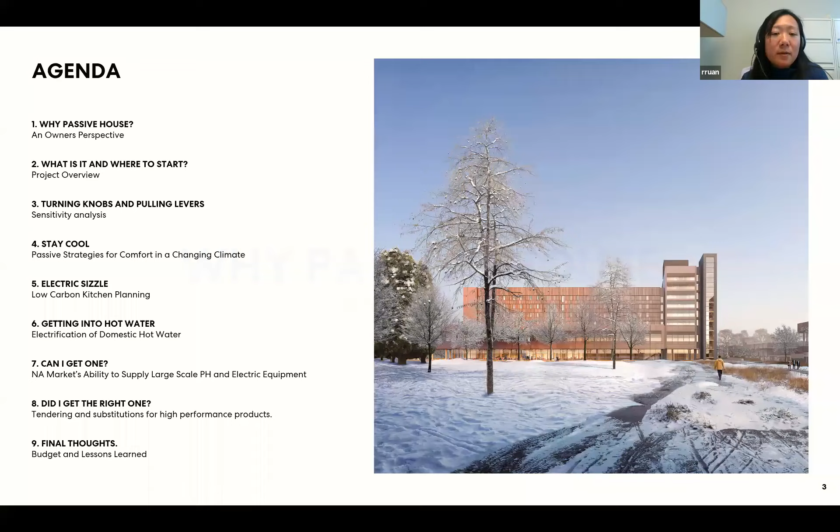The university's big problem, and why they turned to Passive House, is summed up by this slide. On the left we have their existing emissions profile, about 91% from gas. On the right is their emissions profile over time. The black line is the historical emissions profile, the yellow or gold line is their projected emissions profile, and the green dotted line is the provincially mandated reductions in greenhouse gas emissions.

So it's obviously a big challenge for any institution. They're trying to grow their institution and grow their square footage, but they need to lower their greenhouse gas emissions profile. That framed the problem for us, and Passive House was seen as an appropriate vehicle to begin tackling it. You can see that by 2030, their initial target, they have a significant emissions gap per year.

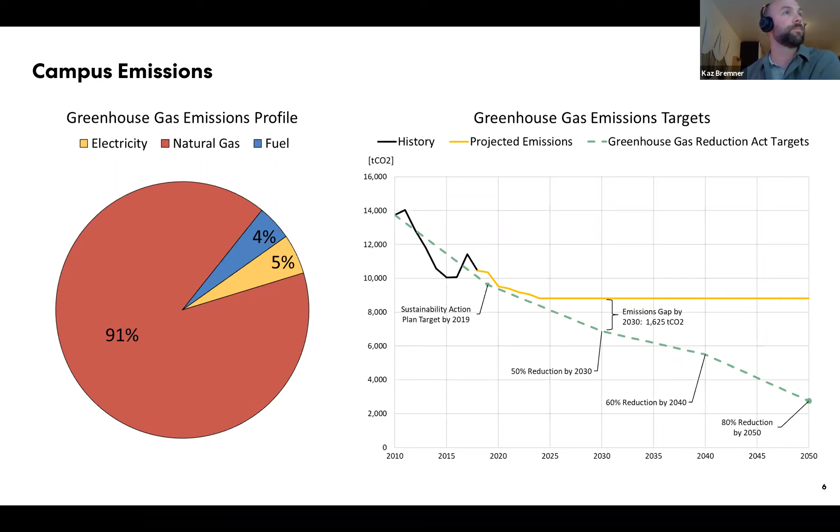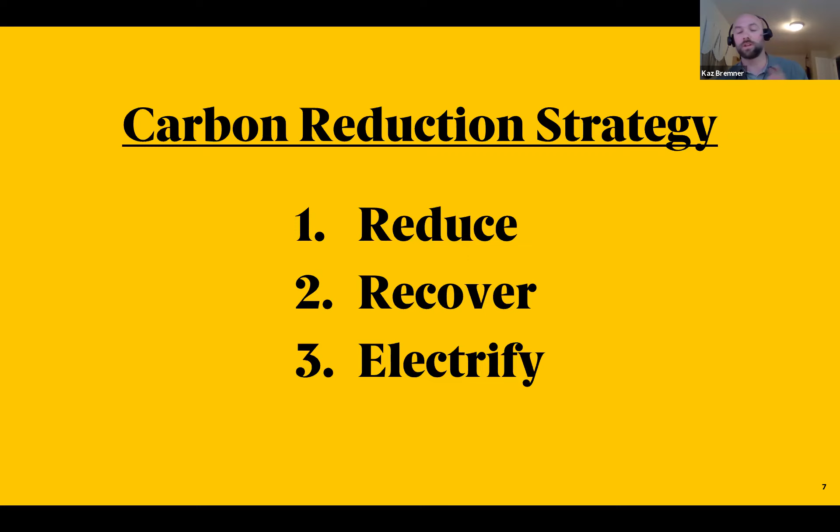So the general strategy we'll talk about today is simple: reduce your need for electricity, recover heat where you can from any heat source, and then electrify. We'll touch on that. Electrify for this project what remains.

Before diving straight into the Passive House target, we wanted to have a quick chat about carbon, because everybody is familiar with the fact that you only have a certain amount - your EUI, your total energy use intensity, which is the metered energy - but you need way more at the power station because of all the losses throughout the process. That changes with the carbon intensity of the energy source you have. So we're all familiar with that idea.

However, when we look at Passive House, we don't necessarily see the word carbon. And yet we still have that same idea in the primary energy renewable target, which might not always be clear to people, but is actually a mix of two measures: the total energy use intensity in your building, and the carbon or energy cost based on which energy source you're working with. So that primary energy renewable target, the second target for Passive House certification, encompasses both. It's not because we don't see the word carbon that Passive House doesn't fully care about it.

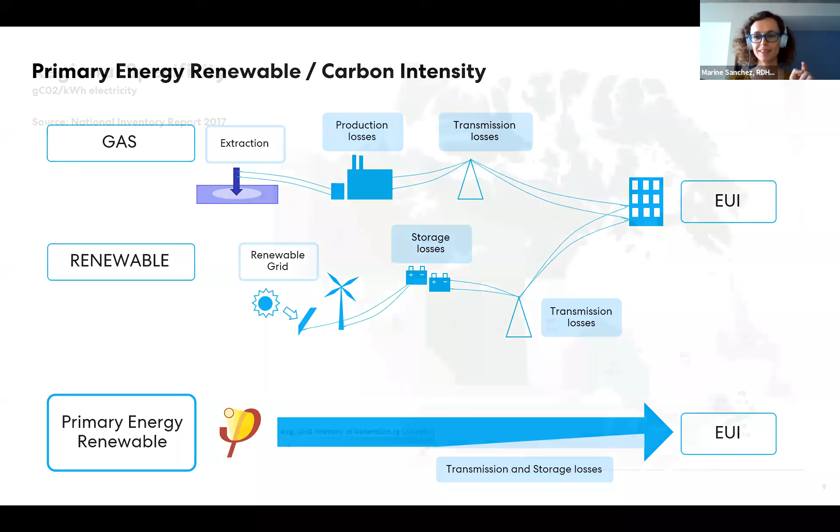What you're seeing here is the carbon intensity of the electricity grid in Canada. I'm sure you're all familiar with this, but it's worth pointing out the difference in factors - roughly, BC is already at a good start, not the best, but really good at 12.9 grams of CO2 per kilowatt hour. Alberta is roughly 60 times higher than that, which really changes the context.

Whereas for some of us, including me, working on the east side, Ontario is about 40, which is still 3 times higher than BC, and Quebec is leading the way with like 1/10 of what BC has of the carbon intensity of the electricity grid.

So it is definitely important to look at the overall picture and then zoom in into where our building is located. So zooming in a bit more, what does it look like for BC?

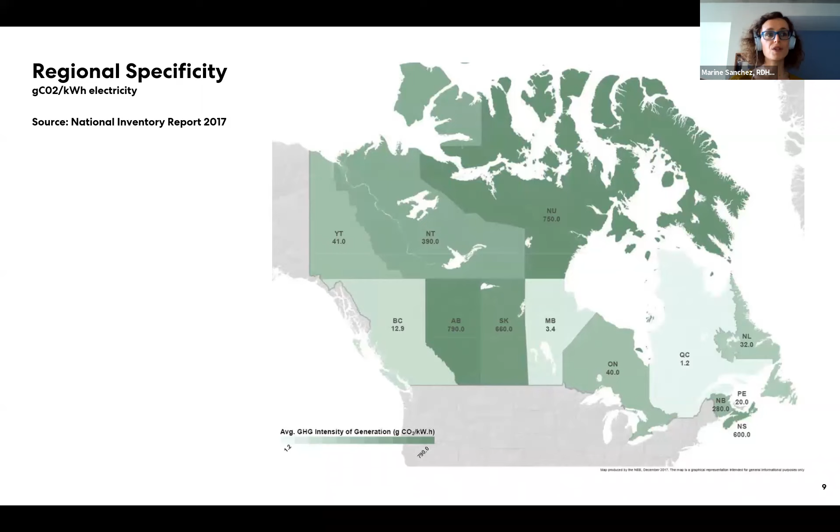Well, we've already seen the greenhouse gas emissions through the previous slides, where you can see the huge discrepancy on the right between the greenhouse gas emissions associated with both the gas and electricity sources. And then the paradox is that the cost is the opposite way, which is not always helpful to make the right decisions. So Kaz and Rufi will touch a little bit more on that later on in the project.

Sorry, so just to step back a little bit, not assuming everyone is familiar with the project, we'll just walk through kind of what the project is, where it sits, what's comprised of, to give everyone a sense of really what we're talking about here.

So zooming in, we saw sort of the aerial photo of UVic before. Here it is just from the top. It's defined by the ring road. The academic precinct lives within the heart of the ring road, and their housing precinct is just to the east, identified here by the dashed line.

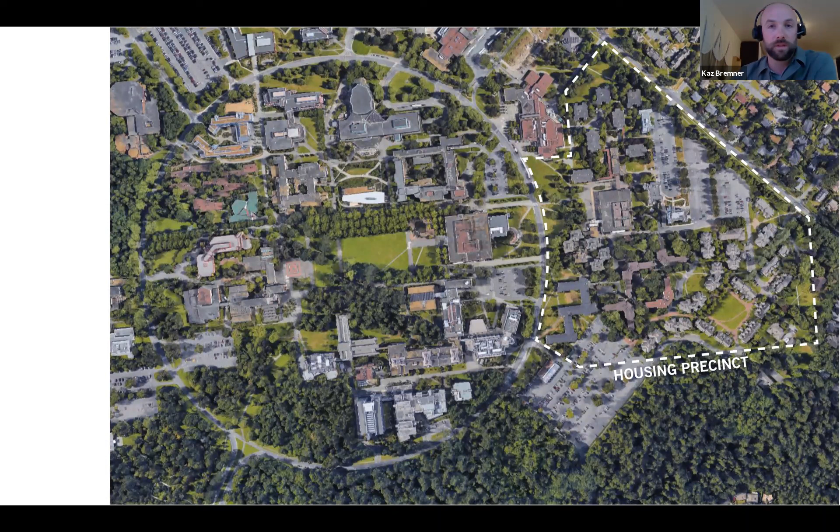We have a large amount of programs, about 330,000 square feet, and it's split across 2 buildings here to help push forward some of the urban and campus objectives that UVic has in place.

The siting was largely driven by the existing campus greenway, which currently runs through the heart of the ring road. It's really high value public thoroughfare, but really peters out at Ring Road. So this siting gave us the opportunity to drive that across Ring Road to better connect the campus and revamp their campus greenway, and also provide a north-south greenway as a new spine within the housing precinct, which will help them organize future renewal and development.

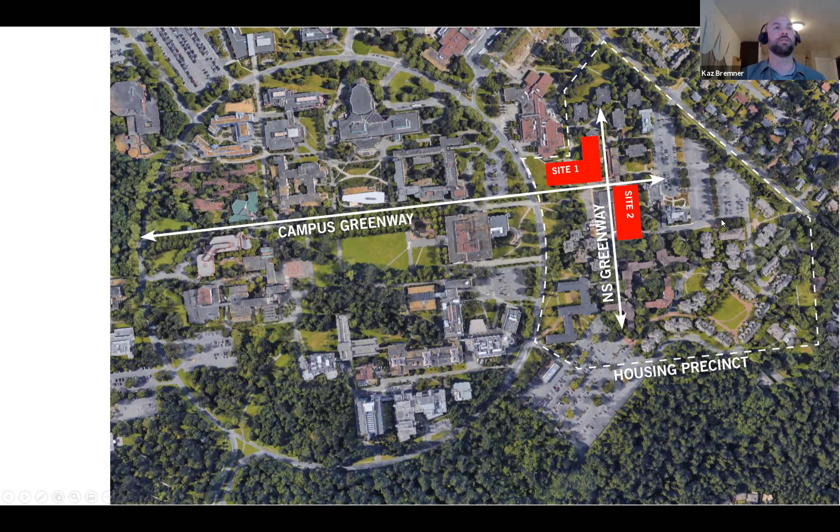At present, a lot of the housing on campus has been developed over time. You can just see from the photo here, there's a lot of townhouse development from when they had the Commonwealth Games, and then they've just sort of piecemealed together as they've had access to funding, and this will help give them an overall master plan framework.

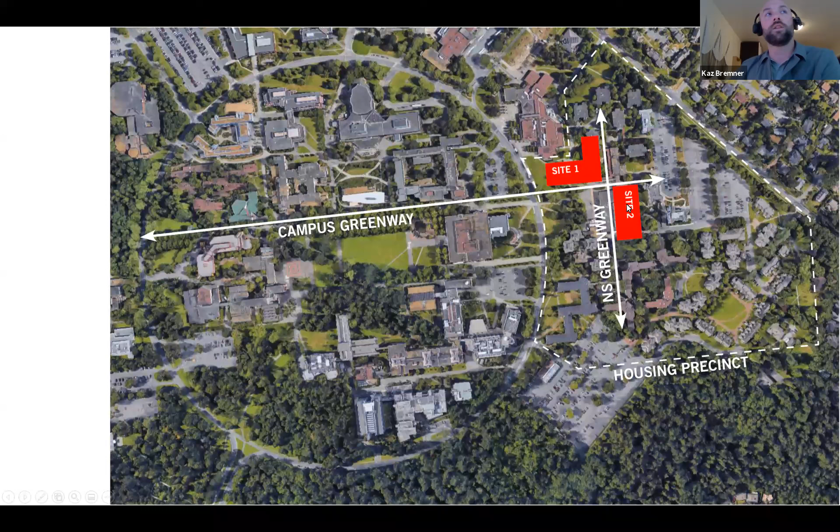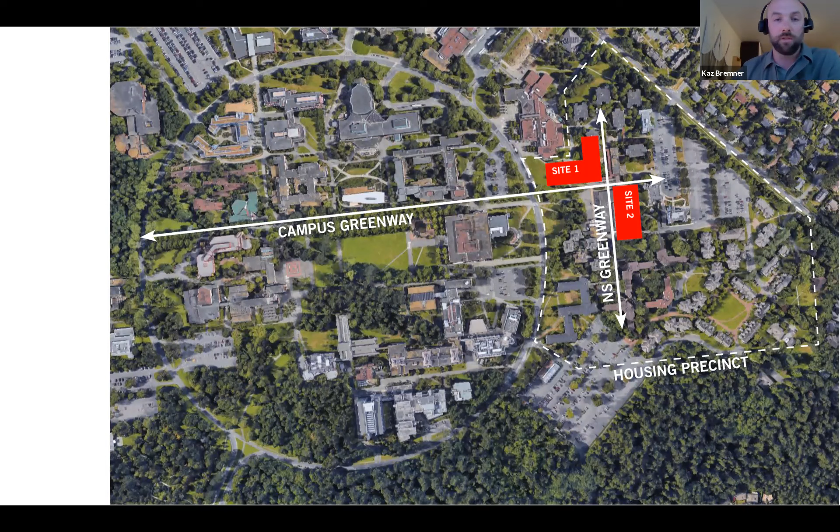I should quickly note that we are deconstructing 3 buildings: 2 existing residences that are aging and in need of a large amount of repair, and their existing dining hall. So with those 3 buildings coming down, we're adding about just over 620 student beds, but we'll have a lower carbon footprint overall. That's a really compelling part of this project - they actually get to grow their campus, but have a lower greenhouse gas emission profile.

So what's in these 2 buildings? This is site 1 on the left and site 2 on the right. From level 3 up, they're both student housing. Site 1 is 6 stories of student housing on a 2-story podium. The second site is 9 stories on a 2-story podium. In site 1, there's a mix of program in the podium spaces, which adds the complexity - the student housing part isn't the hard part, really.

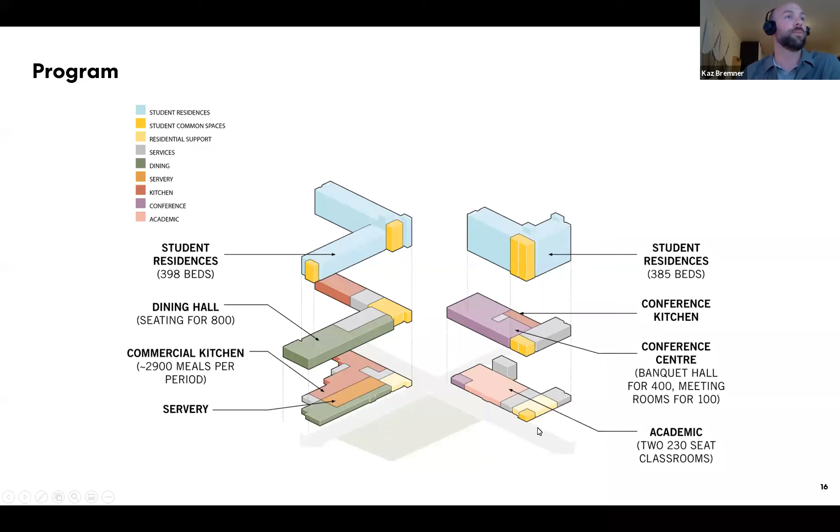But in site 1, we have a commercial kitchen that's serving about 9,700 meals a day. An important note here is that no one's really attempted to certify a kitchen of this scale before, and we'll get into that more later on, but it's an interesting component of this. We have an 800-seat dining hall identified in green, kind of wrapping around the servery and the kitchen. Then in site 2, we have a banquet hall seating about 400 people and 2 large academic lecture theaters on the lower floor. So it's quite a complex mixed use program.

So how do you start that? We worked quite closely with RDH on this and Integral, the whole team, to figure out how do we start to eat this thing in bites. So the tower area on site 1 specifically, which is the more challenging site with the commercial kitchen and the high energy use, about 59% of the floor area is the student housing portion. So we split that into one PHPP model, and then the more complex podium became a separate PHPP model.

So we're working with two problems, one a little easier than the other, taking a blended approach overall. Just to start off and set some targets before we get into the details: we knew the podium, or public spaces, would want more glazing and require more energy use, while we knew we could be relatively aggressive in the student housing portions, since that's a typology that's been certified a number of times across the world.

So we set our space heating demand targets at 8 for the student housing, trying to almost cut in half the Passive House target, and about 25 to have a little more generosity and allow more glazing in the dining hall and similar areas, getting a blended ratio of 15, hitting the Passive House targets overall.

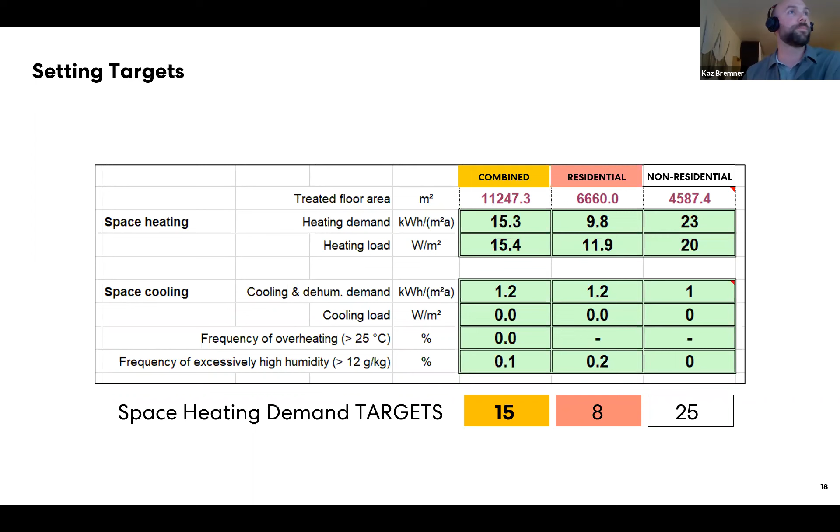One thing we knew could be a struggle through the design process was having a strict glazing budget. These are very public buildings; they want to be transparent in a number of places. One of our concerns with Passive House and client side from the get-go was the idea of a windowless box — that still exists when you see photos of old Passive House projects. It's not the glass box people may want to see in modern architecture.

So we thought about our glass ratio as a budget, and tried to spend it very generously in high-value areas, migrating the public program to where the glass is, or co-locating those things. Here in orange are the public areas — the student lounges up the tower, and the podium spaces — that's where we tried to spend our glazing budget. Also, the form of the building naturally overhangs some heavily glazed areas to avoid the penalty of introducing shading there.

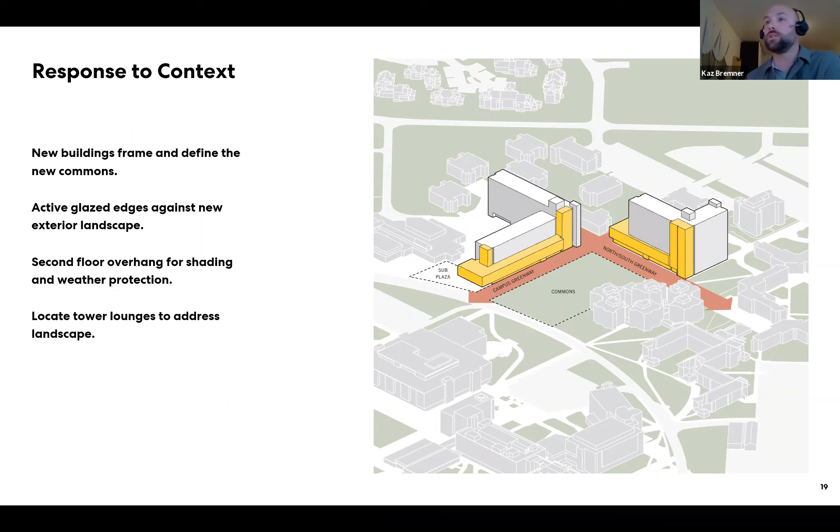After going through these exercises and right-sizing the glazing to the project — looking at each space and what it needed, being generous where it made sense — our original targets were about 30% window-wall ratio through the student housing upper floors, and about 50-50 down low. Generally we recommend a reasonable starting point for high efficiency buildings of about 40% glazing for a residential typology — that's the ballpark.

Here, through the design exercise, just due to the typology, we ended up with 16% glazing through the tower portion — actually a lot less than we anticipated — and only 25% in the podium. I'll walk through what that means.

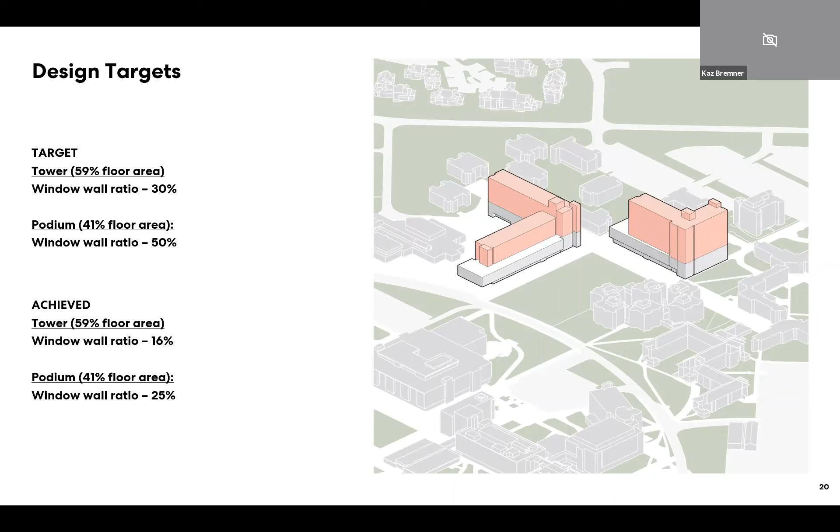That feels really low, but here's a rendering from the interior of the dining hall on the first site, looking south toward the public green space. You can see complete walls of glazing, both upstairs and downstairs, creating as much transparency as possible between the new public realm and these public spaces, opening them up. It just means we're more conservative with glazing where it isn't required.

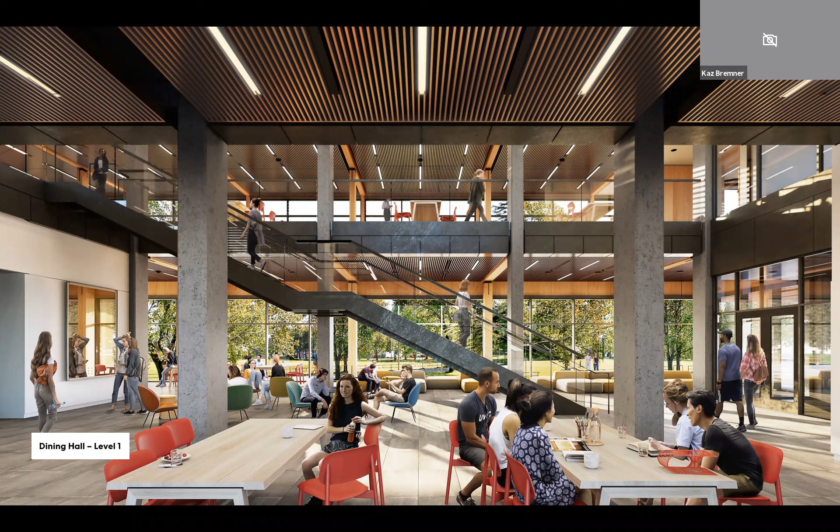So the takeaway is you can still have amazing spaces, amazing urban realm, and amazing transparency, but hit really high efficiency targets. It's all triple-glazed, thermally broken curtain wall, just FYI. Here's another view looking at it from the southwest.

So that's a little bit of the background, sort of what we're looking at. And then for how we sort of started under the hood, I'll let Maureen walk through that.

Thank you, Kaz. As Kaz mentioned, we started with a couple of SD PHPP models, PHPP being the software for Passive House certification. We started with these SD models with rough targets, but in no way is Passive House prescriptive. So more or less, we got into a big game of turning knobs and pulling levers until we found the perfect combination. That's what we were after.

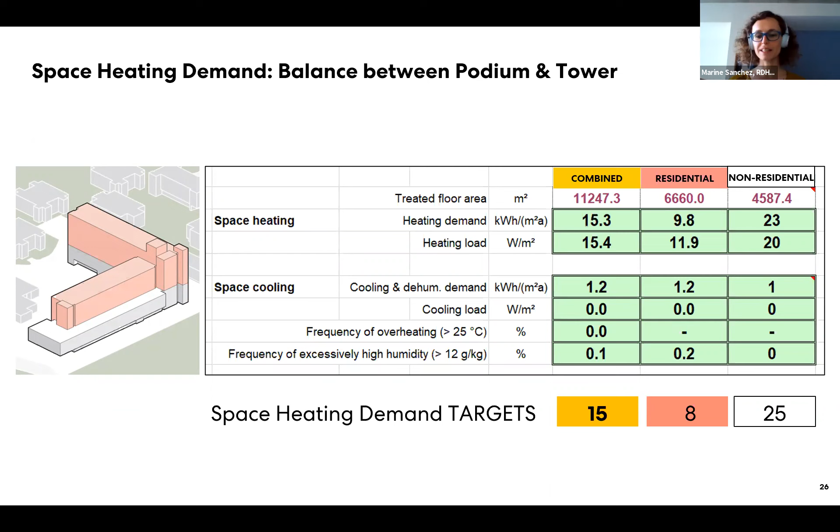Having that starting point, we started to touch a little bit of every plate, every box, every heat loss and heat gain, trying to understand what would make the model sway a lot and what would barely make the model sway.

And this is where the fun really started, with all the graphs everywhere and trying to move literally 15,000 things at the same time and saying, okay, what did I learn today? And what you're seeing is that out of all the sensitivity analysis that we did, the big levers were not necessarily the ones we were thinking about. We found a few more than these three graphs, but we'll start with that.

You're looking on the left at the external wall insulation thickness with and without insulation in the backup wall. You can see that this is moving our tower between a range of 7 to 17 kilowatt hours per square meter per year for the heating demand. Quick reminder, we were trying to stay around 8, so quite a big swing.

For the podium, where we were trying to stay around 25, you can see that the kitchen—we have a big kitchen, we'll dive into this, but spoiler alert, we do have a makeup air and an extract—and the running time, the profile of that ventilation system, made us have a really big swing, roughly between 25 and 40. At 25, we're all good, we're still passing. At 40, we're like, I can't see certification anymore. Guys, can we do something? So that was another big one that swayed the model quite a lot.

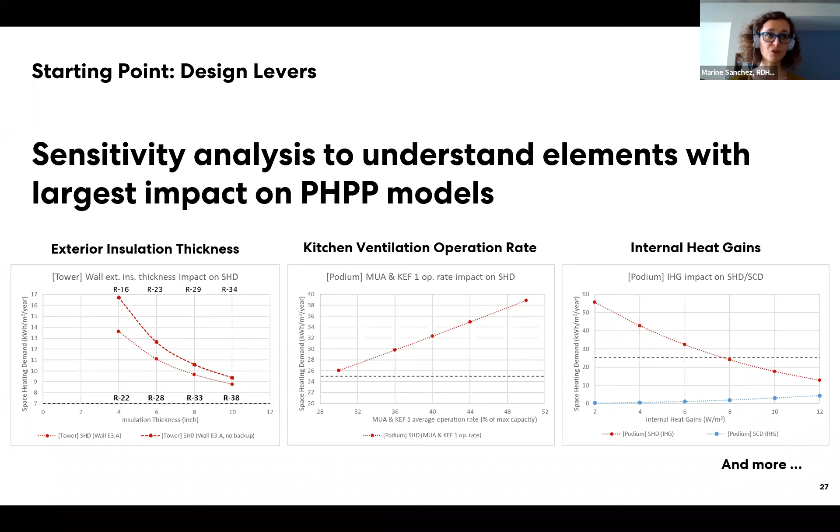So that was a lot of work on all these levers to get to what choices I should make to maintain my space heating demand criteria, which is the first criteria. Now, it'd be too easy if that was the only criteria we were struggling with. So we move on to the next criteria for passive house, the primary energy renewable, PER.

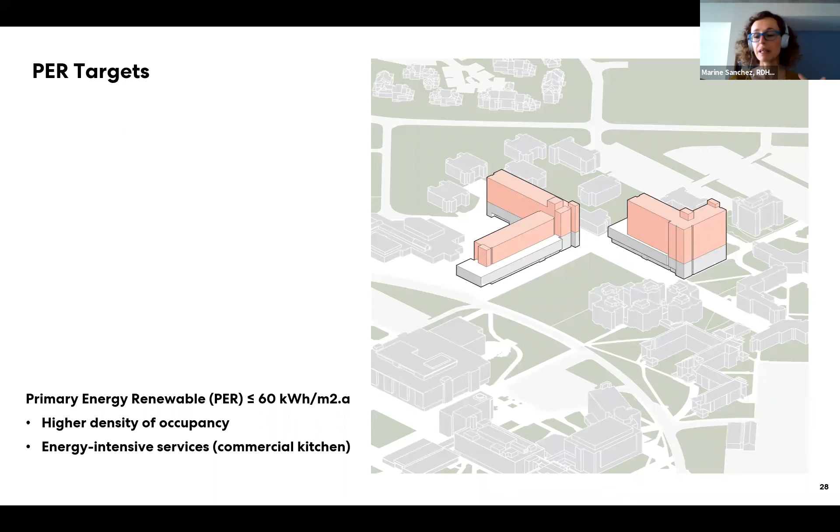The typical PER target is set at 60 kilowatt hours per square meter per year. But in our case, we're dealing with buildings that have a much higher density of occupancy than typical buildings, and we're also dealing with end uses that are terribly energy intensive, such as the kitchen. Luckily, we found a way to obtain additional allowance for the PER target.

We played it in two different ways. We looked at the tower first, in that pink color. After being in deep discussion and negotiation with PHI over the last 2 to 3 years on large buildings, and repeatedly finding that these large buildings could not fit within the allowance given — that 60 kilowatt hour per square meter per year — they created a tool to say, okay, we recognize that depending on your occupancy, the size, and the number of occupants in your building, you should be allowed a little bit more. So we used the tool to get an extra allowance on top of the 60.

For the podium, we also managed to get an extra allowance, but on a different basis. That time, trying to be fair and look at a metric that would be fair against other buildings, we're not talking in square meters anymore — we're talking in how many meals we're delivering every day and how much energy is required per meal. So we'll see with the kitchen section the dive we went into to get to that energy-per-meal approach and additional allowance.

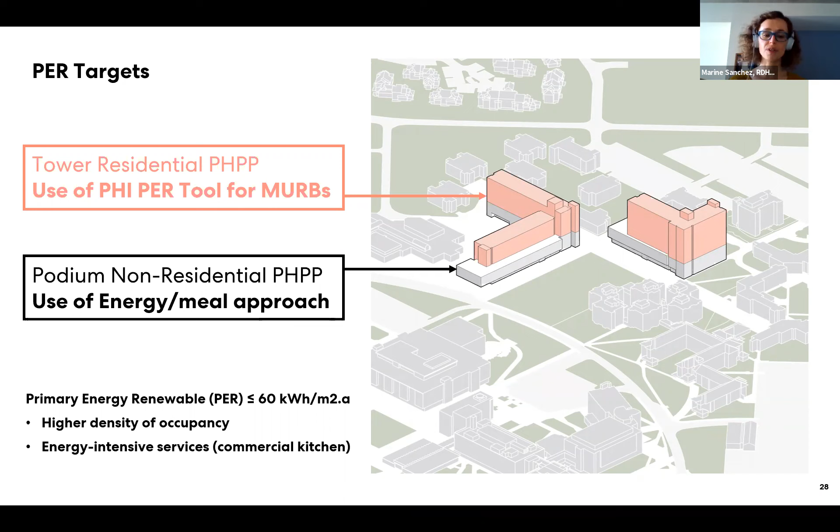Giving you a quick snapshot on the tower, you can see we had a little bit of an issue to start with. This is the split per energy, per end use — heating, cooling, domestic hot water, and household, with a different degree of granularity, plugged against the 60 kilowatt hour per square meter per year PER limit we had. You can see we're miles past that. So we were all scratching our heads a little, saying, I do not really see how much better we can get to get back in line.

Now, using the new tool that is available from PHI at the moment, only through certifiers, we plugged all of that in and had a big sigh of relief. I think we had probably a little happy dance with the design team, saying, hey guys, with the type of building we're talking about and the number of occupants, this is what we're looking at.

We're looking at a PHI PER allowance from 100 to 115 roughly, which is being refined as the design progresses. The density does have a play into the total amount of energy your building is going to use, as well as your PER target. Using that tool definitely saved us in terms of what was allowed, and gave us a bit more breathing space back into the design, because this helped inform the decisions we had to make later on.

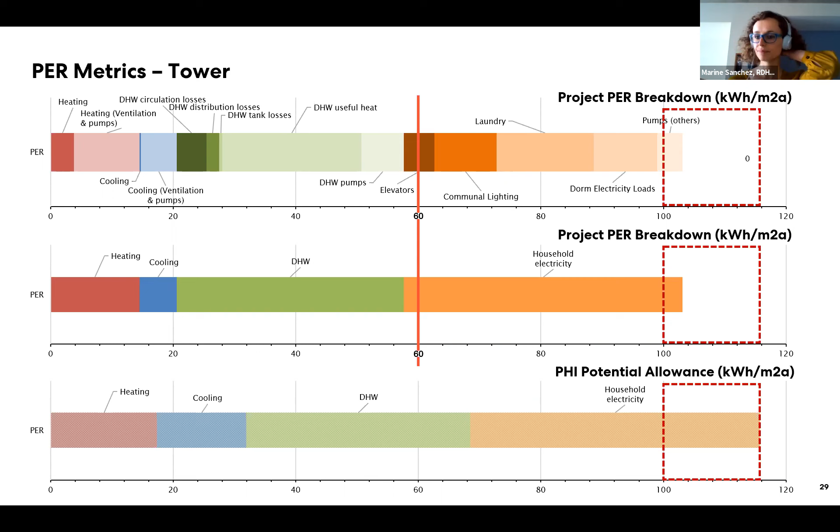Thanks, Marine. As mentioned by Kaz and Marine previously, the project is working very hard to meet passive house onerous space heating demand and primary energy targets. However, passive house requirements are not the only focus throughout the whole design process. The design team and the client have given a lot of consideration to future climate change, like how to make the building resilient enough towards future climate change. Because we know passive house encourages the building to have a very robust envelope to minimize unnecessary heat loss, however, without clever planning, this may also lead to overheating risk by trapping all the internal heat gain inside the building facade.

I guess just trying to give everyone a bit of my background. I worked 12 years in the UK before moving to Canada, and in the UK, usually at the beginning of the project, we always undertake two analyses: one is the overheating modeling, and the other is the PHPP modeling.

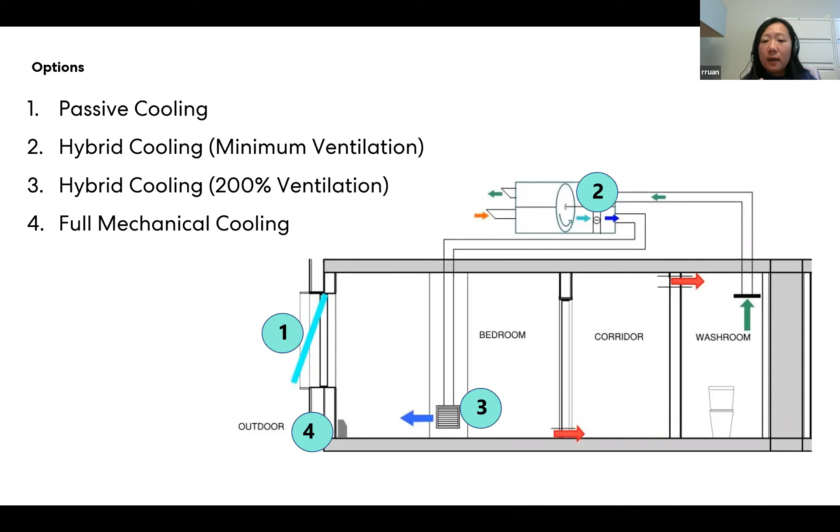So what we considered at the beginning are 4 options. Option 1 is to use passive cooling through natural ventilation strategies. Option 2 is trying to temper the ventilation air at a minimum ventilation rate to comply with passive house standard and code requirements. Option 3 is similar to option 2, but increases the ventilation rate and hence increases cooling capacity. The last option is to use a full mechanical cooling system.

Tempering the ventilation air, supplying it at 14 or 16 degrees, will enhance the building's resilience towards future climate. The more ventilation air you deliver, the more resilience you get, but it's at the expense of adding more energy consumption and cost to the overall project. Going completely to mechanical cooling would guarantee full resilience under future weather files, like 2050 or even 2080.

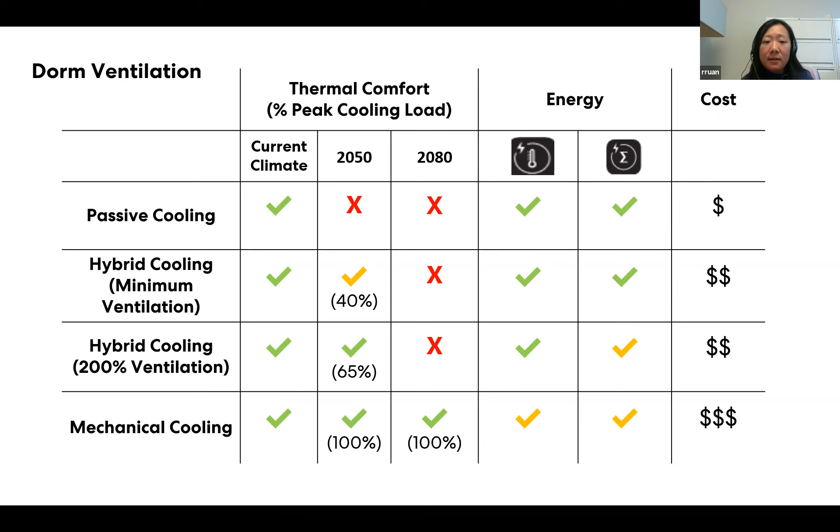This diagram demonstrates the final strategy we incorporated into the dorm portion of the building. What we adopted is hybrid ventilation. For the dorm portion, we rely quite heavily on natural ventilation, incorporating manual openable windows with large openable areas. We also introduced a window reveal which acts as solar shading to reduce solar gain into the space, and we incorporated thermal mass, like exposed concrete surfaces, to modulate internal temperature. All this methodology helps encourage users to use natural ventilation and maintain thermal comfort.

In addition to natural ventilation, we also incorporate mechanical ventilation, fed from a centralized heat recovery unit, which has the ability to cool incoming air to lower temperatures through a built-in DX coil.

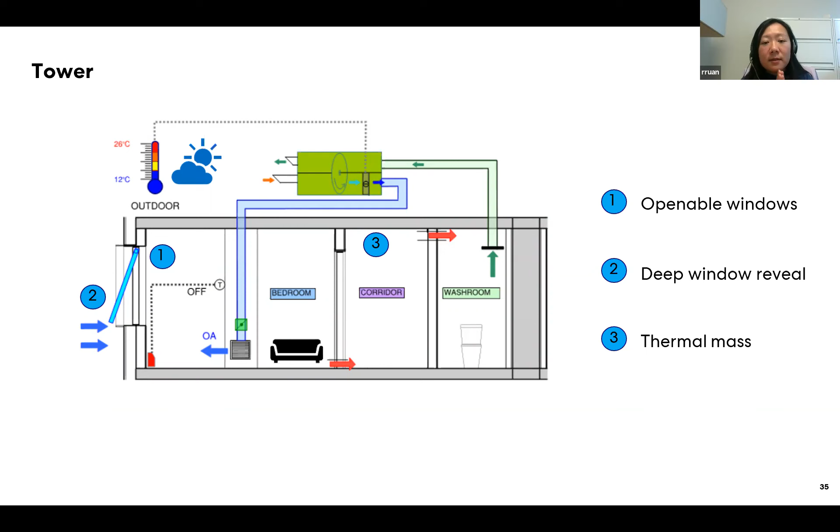After completing the design, we tested it again using TAS modeling methodology against the four weather files I explained previously, and presented the results to the client and design team.

Throughout the whole discussion, we reached agreement that the mechanical system will be designed to address the 2050 weather file. The reason is that, first, in order to meet the 2080 weather file, the current design would have to be changed quite dramatically. We'd have to double the free area for the windows, and also double the ventilation rates fed from the heat recovery units. All this would have a significant impact on the shaft size and space planning.

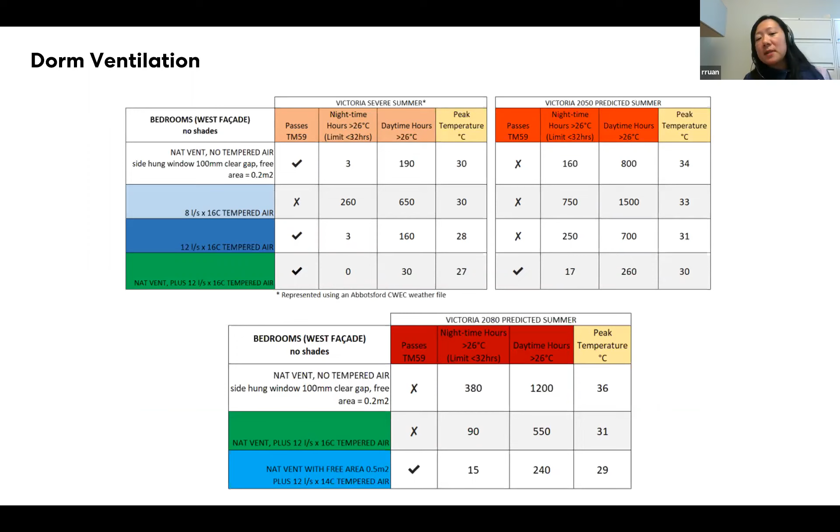Also, 2080 is further out in terms of predicting future weather, so there's a lot of uncertainty for 2080. By that time, all the mechanical equipment will probably already have been replaced as it reaches its life expectancy. Considering all these elements, the design team agreed to address the mechanical equipment to the 2050 weather file to maintain thermal comfort.

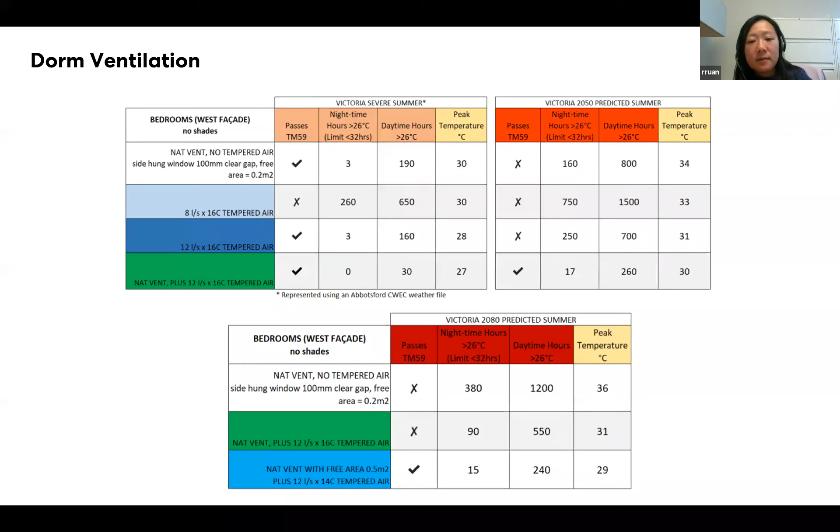What I explained before is the strategy for the dorm and tower portion. For the podium, level 1 and level 2, the strategy has been quite different because, as Kaz mentioned previously, level 1 and level 2 try to incorporate a lot of glazing into the space in order to create transparency from the internal space to the external environment.

The space also has high occupancy, so the focus has been on minimizing cooling, while balancing the requirements of space heating demand as defined by Passive House. We worked closely with Marine and Kaz, doing a lot of thermal modeling from Grasshopper to TAS modeling in order to optimize the solar shading for the podium level.

In order to avoid over-designing the solar shading or the openable area, Kaz's team also worked really hard to dig into the historical sales data of the dining area, in order to anticipate a quite accurate occupancy profile throughout the whole year and throughout the whole day. People generate heat, and if you have a densely packed occupancy, you'll need more cooling, impacting thermal comfort.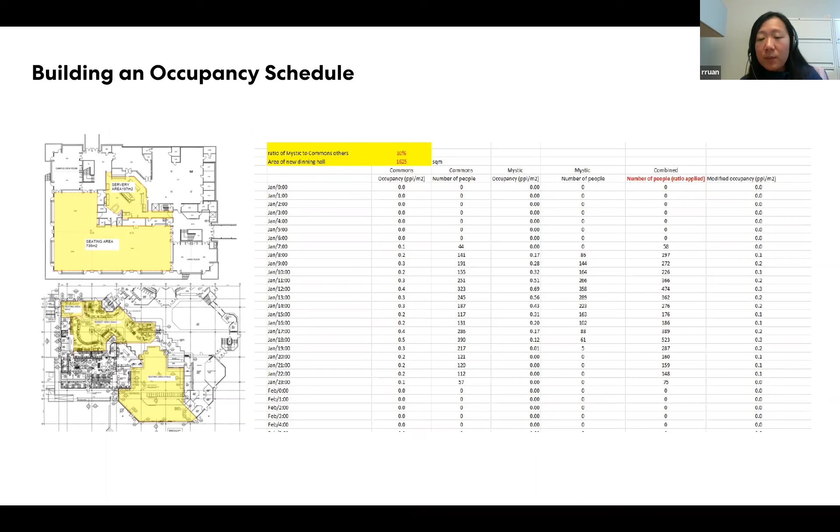So the occupancy profile plays a quite important role in determining thermal comfort in the podium space. This is the profile Kaz's team derived from the historical sales data, and it has a dip during the summer period, which helps with overheating scenarios during summer. Marine, do you want to add from a Passive House point of view?

That was a really big exercise that the Perkins & Will team did on existing sales data to translate it to the building we were working with, which got into a very high level of granularity used by Integral to plug into their overheating dynamic models, and then further translated into PHPP input data, because the Podium is an archetype we've never worked with. So we have no basis, no default input data. When looking at the key levers, it was important to understand the occupancy in this space, which impacts internal heat gain, because people are a little heat source we're trying to use to spend a little less on heating. That was a key item of modeling dragged throughout all disciplines.

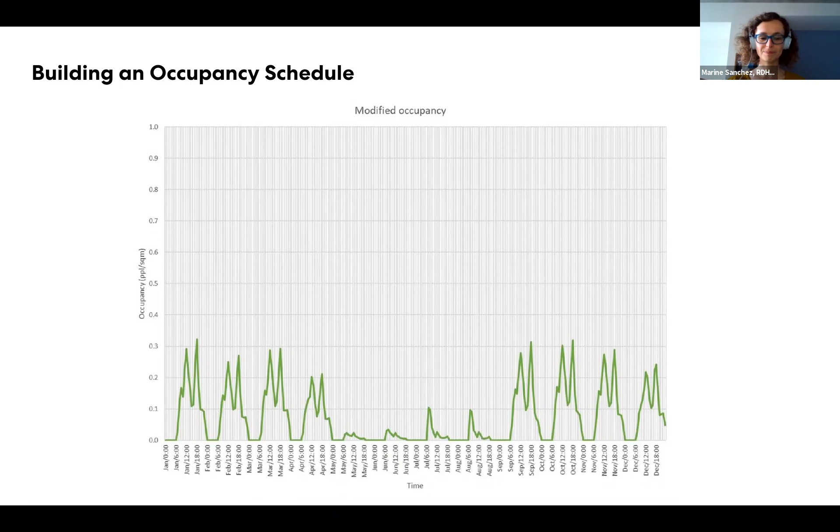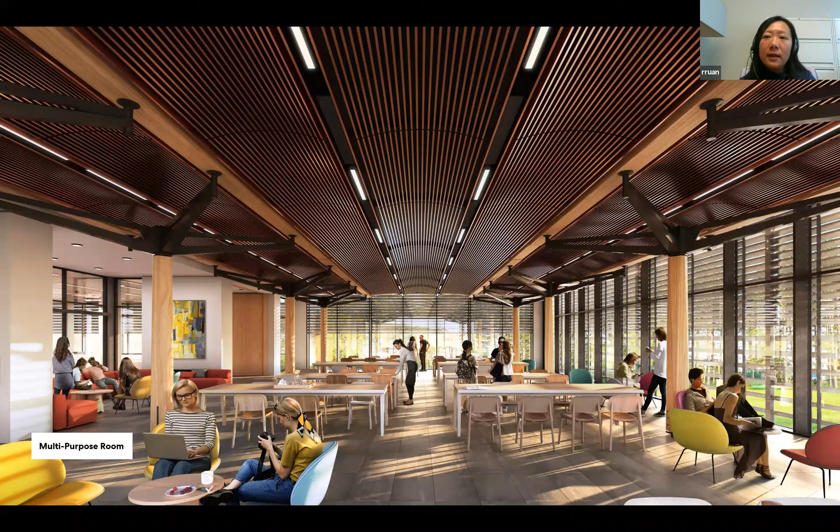In addition to solar shading, we also incorporated mixed mode ventilation. For the dining area and multi-purpose room, we've incorporated high level automatic windows linked to a temperature sensor. Whenever the external environment allows, the automatic window will open and encourage natural ventilation throughout the space.

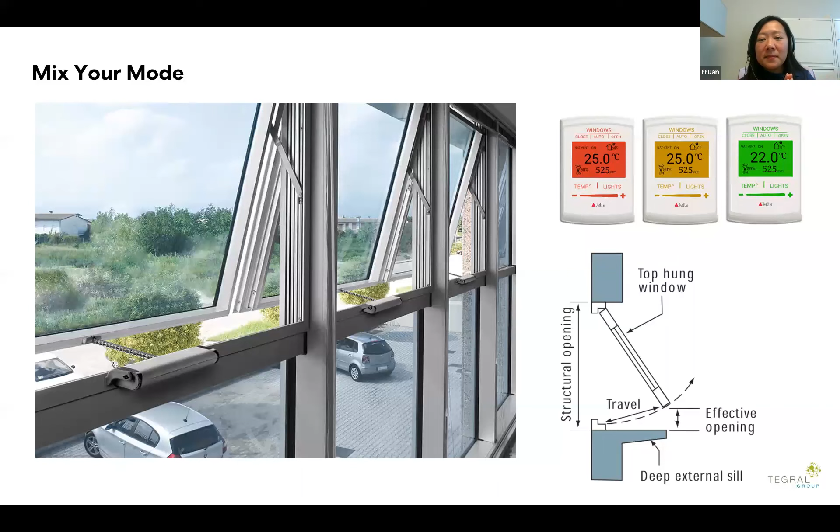Let's demonstrate the strategies throughout the whole year. During peak summer, when outdoor temperature is higher than indoor, the spaces will close the window and initiate full mechanical cooling, delivered through tempered air from HRV units in conjunction with fan coil units, giving full thermal comfort during peak summer. During shoulder season, when the external environment is okay and we don't have forest fire, we encourage natural ventilation. The automatic window will open in conjunction with mechanical ventilation from the heat recovery units to enhance airflow and dissipate heat generated from internal people, lighting, and equipment gain.

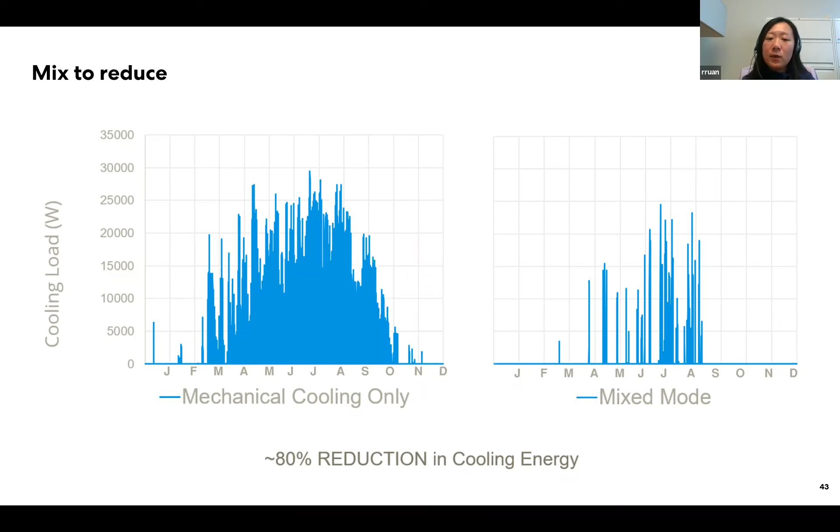Next one. As for the space cooling demand, which people don't mention as much because we're in a heating dominated climate, the work from Integral gave us results showing this graph was like, okay, we're good. Thanks.

Okay, so moving on and taking a deep dive into the kitchen - how to plan for a low carbon kitchen. That was fun, totally uncharted territory, as Kaz and Rufi can attest. What is that new challenge? We've been given a set amount of energy - the energy budget, both on the space heating demand, space cooling demand, as well as the PER side of things. We're working really hard to make it fit into a tight budget allowance, then getting told we have a kitchen trying to serve 8,700 meals a day.

And this is where I scratch my head saying, okay, this is not going to work. Bringing a kitchen that size into passive house levels is something that has never been done before. So there's been a lot of work done internally within the design team, as well as a lot of back and forth with PHI, trying to support us in that new exercise, trying to figure it out.

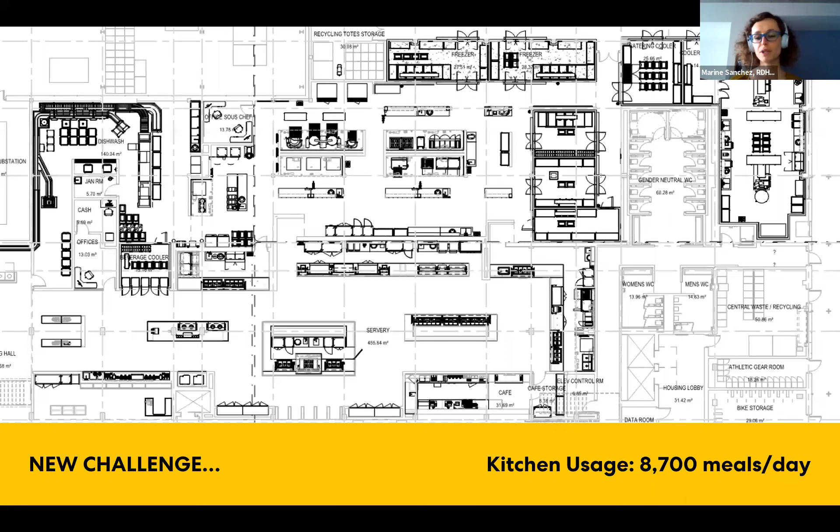Giving you a bit of reference, when we did a literature review, we saw that it takes an average of about 4.5 kilowatt hours of final metered energy per meal. Throughout the whole process of figuring out what was happening with our kitchen and where we wanted to go, after a lot of negotiations and a lot of, I guess I'll say, sandwich counting from Kaz and their teams, PHI gave us an allowance of 1 kilowatt hour per hot meal. So you can see we're already talking about cutting the energy consumption by a factor of 4, if not further, when we start touching on cold meals and other things. So you can see we had quite a challenge on our hands. Where do we start?

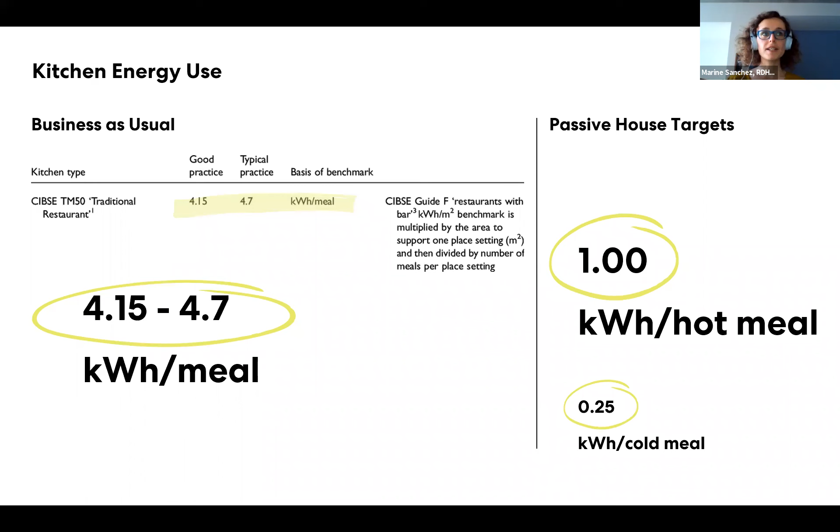Funnily enough, there are actually a lot of things that are free to help us get to where we want to be. These measures are literally good planning, but you need to know what you're looking for to get to that good planning. So where are we starting?

The kitchen uses a lot of energy, and where does it use energy? The first culprit is actually the ventilation system. We're cooking a lot, therefore we need to exhaust a lot, therefore we need to bring a lot of cold air in, and that amount of cold air that we have to heat is the biggest culprit. So if we're trying to get less ventilation while still maintaining a good standard in the kitchen, we're not talking about cutting services or cutting the quality of the space.

If we want less ventilation, we start with: how about products that produce less heat? Well, that's a whole bunch of equipment that we change from gas or electric to induction-based equipment.

As Marine mentioned before, throughout very careful kitchen planning and also through very careful selection of the kitchen equipment, it really helped to reduce the overall requirements for the kitchen exhaust flow rates.

However, as Kaz mentioned, this is a commercial kitchen which serves about 9,700 meals per day for the entire campus. So we still end up with approximately 10 cubic meters exhaust flow rate, which means you need about 9 cubic meters per second of makeup air. You can see on the right of your slide, and as Marine mentioned before, we did a lot of sensitivity study. If you turn the knob for the makeup air towards the higher end, it will have a really big impact on your overall space heating demand. So how can we reduce the kitchen exhaust flow rate further?

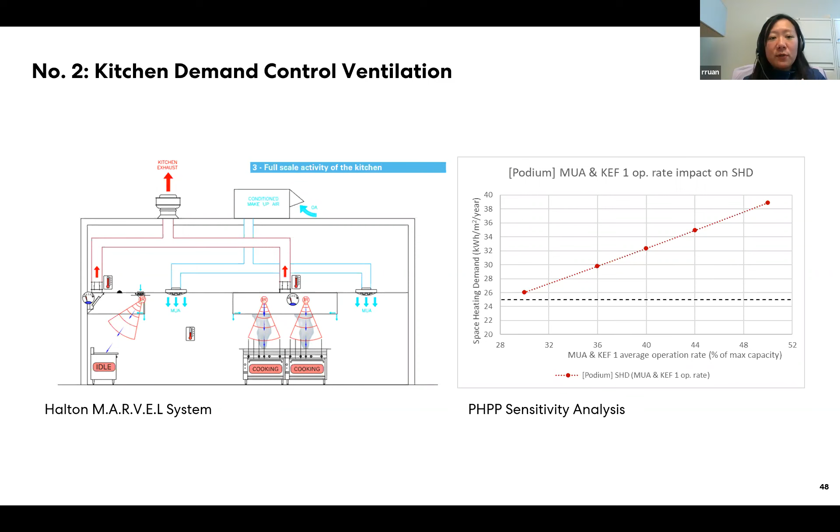So we have looked at a lot of measures, as Marine mentioned, we're trying to avoid island ventilation, and we're trying to use all electric equipment. But on top of that, we actually look at using on-demand control ventilation system for the kitchen ventilation design.

What does that mean? It means basically for each kitchen exhaust hood, you have an automatic balancing damper that links to the infrared sensor, which senses how much heat is generated from the cooking station. Then they will send a signal to the automatic balancing damper, which will change its position and the speed of the fan to decide how much exhaust flow rate is needed in correspondence to the amount of heat generated through different cooking activities.

That will reduce the overall exhaust flow rates. Also, each kitchen hood incorporates a capture jet technology. Don't be scared by the name, but it's basically a fan built into the exhaust hood which creates an air barrier to the front of your hood. What it does is create an air barrier so you can avoid the escape of the thermal plume generated from cooking stations. This way, it's more efficient to capture the heat through the hood, and you also reduce the kitchen exhaust flow rate further.

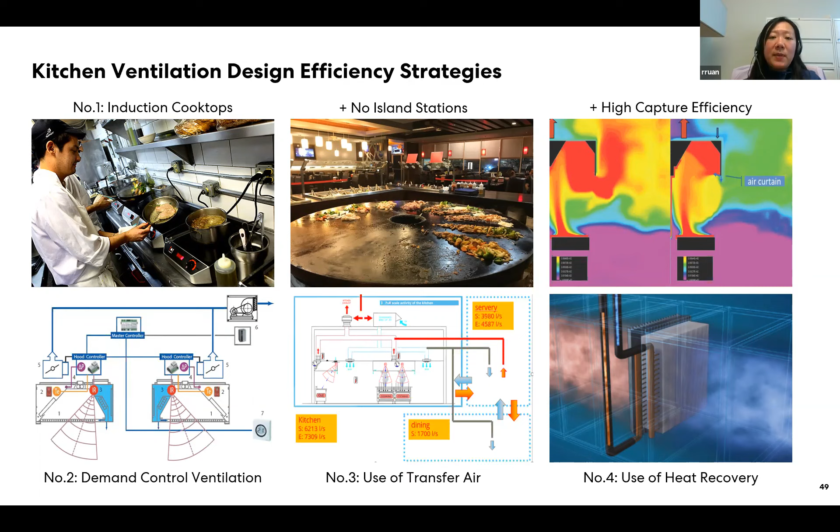Through all the technologies I just explained, plus Marine's careful kitchen planning and selection of kitchen equipment, as you can see, the overall reduction is really significant. From the beginning baseline PHPP model, we managed to reduce the overall space heating demand by almost 82%.

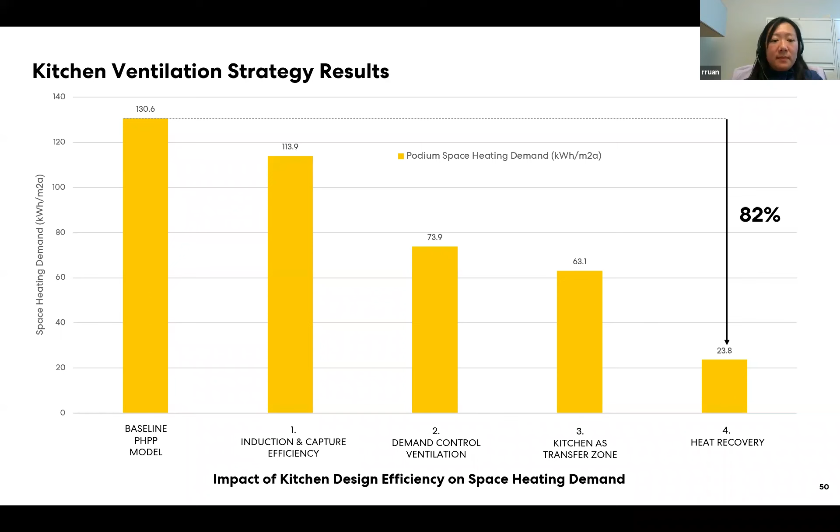As Rufi presented, that was a lot of work to tackle the first culprit in the kitchen, the ventilation linked to all the activities we have there. After careful planning and all these measures, we got to a point where the model was working again on the space heating demand, because ventilation is one of the losses in your balance exercise that impacts space heating demand.

However, ventilation was not the only thing in the kitchen that was breaking our models. What's next? The next item in the kitchen is the equipment themselves and the energy consumption associated with them.

Remembering back at the beginning of the presentation, we said that the PER does include that notion of carbon intensity behind it. The first step was for the entire design team to go back to the university and the kitchen staff and ask, can we switch from gas-based to electricity-based equipment? We started the design, about 2 years ago, with 25 big gas-based equipment.

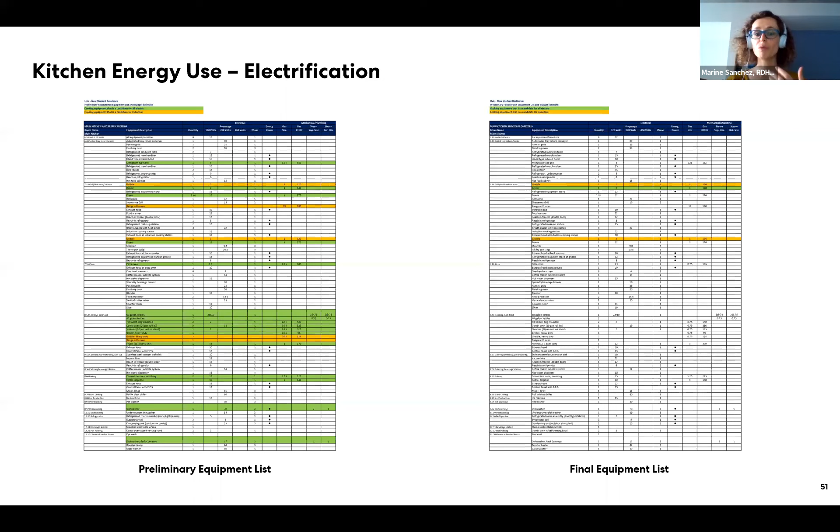Throughout that design process, going at it with a comb like probably 2,000 times if you ask the kitchen consultant, we ended up reducing everything down to 3 pieces of equipment, and then down to 1, with new equipment appearing in the market as our design progressed. That was a huge thing - from 25 to 1 gas-fed appliance, we actually obtained an 83% reduction in greenhouse gas emissions, which is absolutely key.

Looking back, I was just going to add one thing to this, because there's an interesting point going through this exercise. When we began this process, from a client management and food service perspective, the food service operations at UVic considered cooking with gas the gold standard. That's where we started, that's what we wanted, and no one was telling them otherwise. So we started to bring forward ideas of electric and induction, and it was a long process of introducing them to these products and sending them on product tours. They did engage in the process.

One thing that's really interesting about this process too is that there was a bit of reluctance from some parties earlier on, but as they started to announce their intentions toward Passive House and saw how the world around them became interested in the project because of that, you could see the user groups become excited and really start to lean into it.

And then people like the food services and the chef really got on board, working really hard with our team and the food service consultants to make this happen. So I just don't want to have people think it's just that easy. We suggested it and everyone was like, great, let's go all electric.

At first they were like, no, electric doesn't work. It can't work for our use. It doesn't heat up fast enough. It's not reliable enough. But when you really get into it and you see the new products, particularly tending toward induction, it's just the way this market's going.

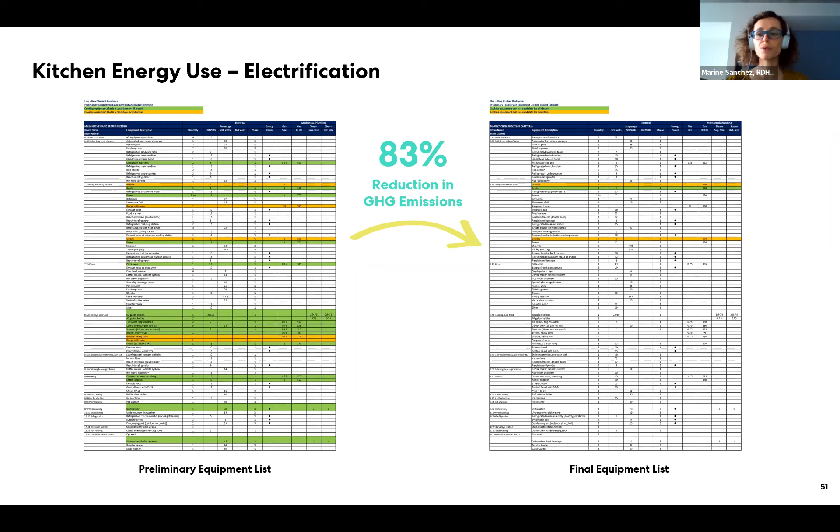Next slide, which brings the same point as well. First of all, we were looking at completely uncharted territory, trying to figure out what was going on and how we could make it better, and how we could even make it fit into the really small allowance that we were given by PHI. Rather than looking only at a quantitative approach, which is typically what Passive House does, calculations, we actually looked at both a qualitative and a quantitative approach.

So what does this mean? The qualitative one was to say, look, we don't really have a lot of monitored data, but we do have common sense and we know what works and we get a sense of what will be useful. So let's go for a full checklist to make sure that we've done the best we can without any calculations.

This is where you can see, on the pictures, touring supermarkets in Austria, we had a whole list such as display coolers will need to have a door. There's no open display coolers. Your walk-in freezers and coolers will have to have the thickest insulation in their walls that you can get from the market. Working on compressor systems rather than separating all of them, which means that you could not recover the waste heat.

Trying to plug as much as we could into one system so that we could finally get a heat exchanger and get some heat out of that. So a whole set of systems.

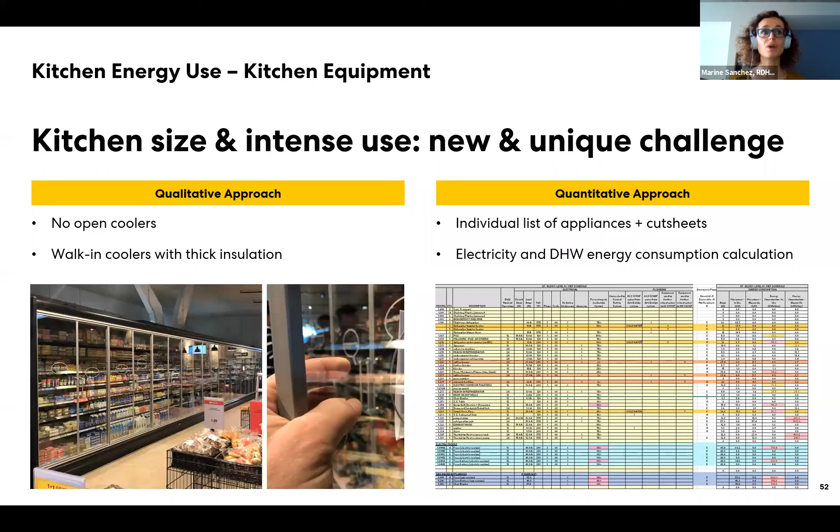But what did it lead to? It led to a lot of deeper understanding and us finding a way to fit within where we wanted to be. We did a rough first calculation when we started diving into the line-by-line equipment list, and we were like, oh okay, it seems we're at one on the electrical, the kitchen equipment, and we have 0.23 kilowatt hour per meal on the domestic hot water. So we thought, okay, we are within reach. We need to do a little bit more and we'll get there.

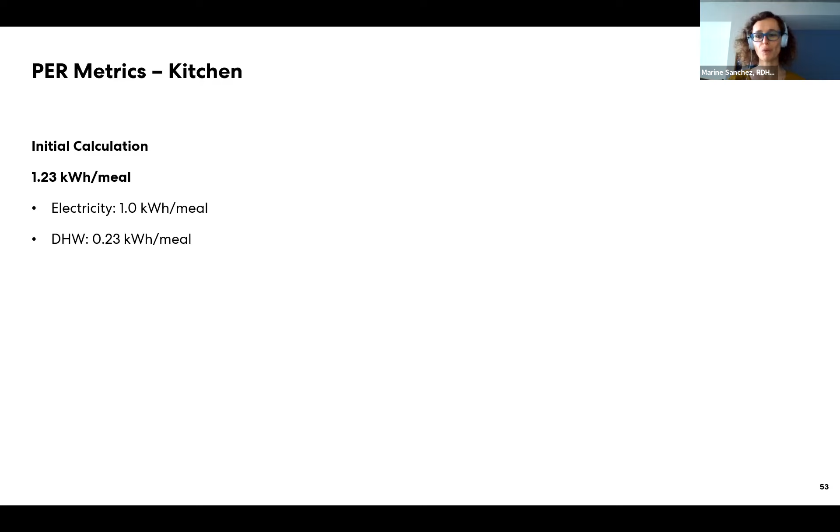Then trying to dive in to understand the bigger appliances and everything that was going on, we found that things were not moving the right way. 1.23 became 1.64 because we found some little inefficiencies.

Such as us becoming kettle experts, where we were trying to trace where the water was coming from — where you get cold water that gets heated to 60-degree hot water through the common system, which then was mixed down with cold water to get back to 43 at the tap, which was then used to put into a kettle and then taken through electricity back to 80 or 100 degrees, boiling point.

So connecting with a kitchen consultant to understand how every single one of these equipments was going to be used was really key for us to then move to the next phase and say, okay, this is not really efficient, we can do it this way better, and that part we can use waste heat and things like that. We've also had the luxury, with time, of having more electricity-based equipment showing up in the market.

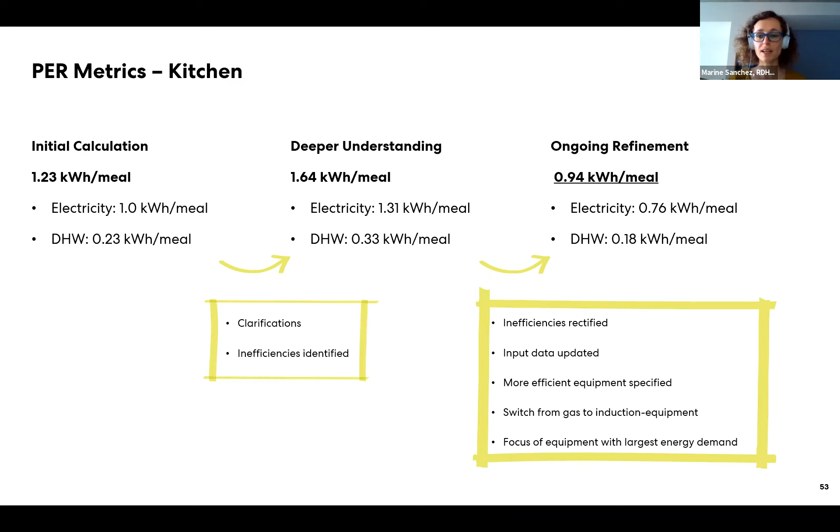So being able to keep on reducing that number of gas-led appliances put us to 0.94 kilowatt hour per meal altogether, between electricity and hot water. So again, with that deeper understanding, we could get to that higher energy performance.

But that could not have been done with a team that didn't buy into it. I think at one point I'll just add here, that's interesting, not to downplay the effort into this, as there was no certification metric.

We were inventing the metric. The one that we showed earlier was really the product of coming through this whole exercise and defending to PHI what we needed. And in that, to say we became kettle experts is a bit of an understatement.

We really had to identify literally every piece of equipment in the kitchen, understand its energy inputs, how much water is it heating, how many times a day, to what temperature, from what temperature. So there's a lot of legwork there, and really close work with PHI, just to help people understand what's involved in this kind of exercise.

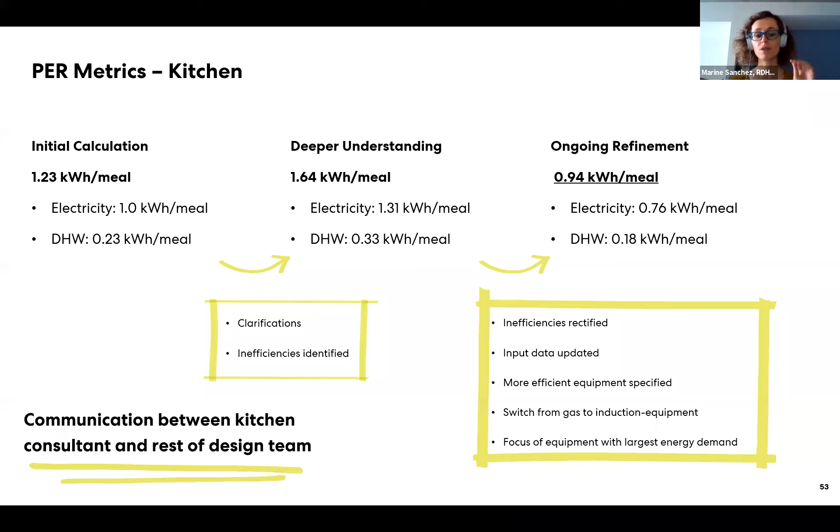So we talked about the electricity consumption of all the kitchen equipment. You can see that we started to touch base on domestic hot water, which is as well a fun subject with Passive House. So where do we start?

First of all, if we look at a standard Passive House, I know everybody's probably familiar with Passive House on this call, but I thought it was a good reminder to show that on a typical household, you need so much heating demand that your domestic hot water takes a backup seat. However, with Passive House, you've worked so hard at making your enclosure performing that the domestic hot water, which is the blue-green color here, becomes the biggest end use, right? Because you barely need anything for heating or cooling, so domestic hot water is the big one.

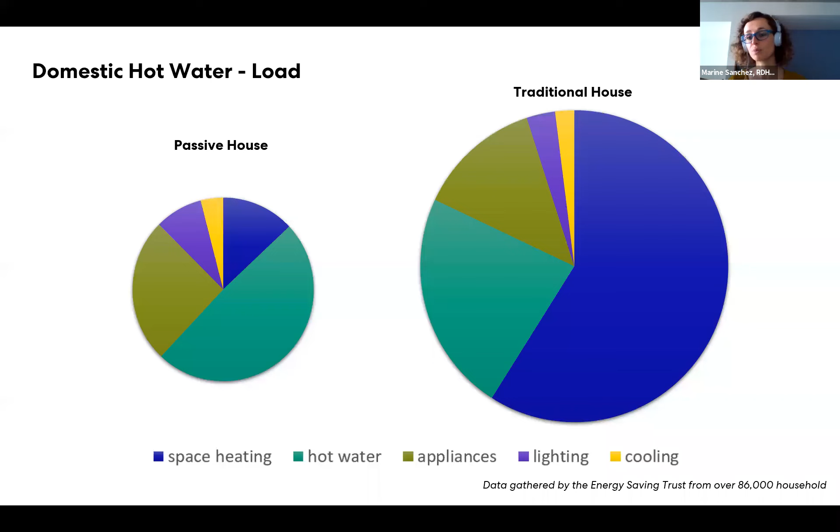So that is the setting in a residential project. And if you would have asked us earlier on how it would have been on this project, we would have said, well, surely the residential towers with almost 400 beds on each side, that has to be where most of the domestic hot water goes.

And then we went and did our calculations and came back saying, wait a second. You know that residential tower that you thought was so big? It's actually only about slightly less than 10,000 liters a day. And if you look at the kitchen, we have about 3 times more daily domestic hot water demand in that kitchen than we have in that tower, purely for showers, leaving alone additional domestic hot water demand for laundry or washroom or anything else.

So with such a high demand, and probably using a big piece of the total energy budget that you're allowed, how do you tackle it? Well, spoiler alert, same thing as what we mentioned before. Still take the same approach. You start by reducing the demand, to make it from big to small or smaller as much as you can.

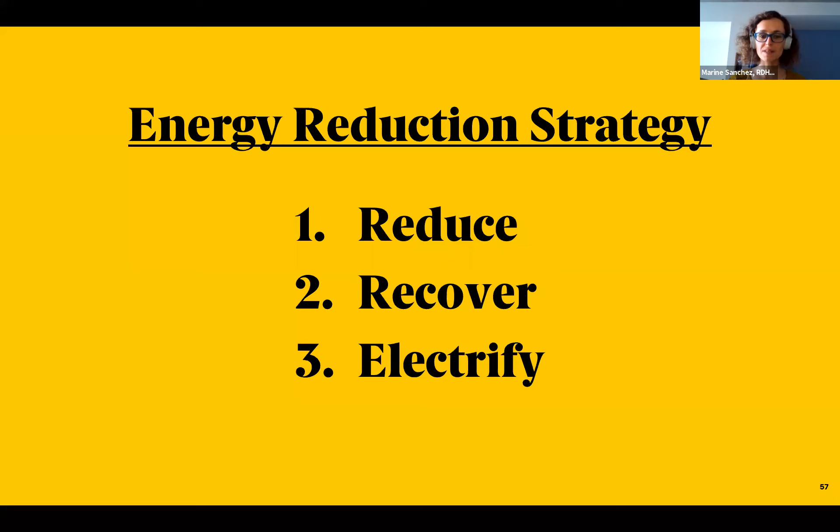Then you recover, right? Whatever waste heat you might have from anywhere, you are trying to reuse it towards that end use. And once you're done with it, you're trying to meet your smaller remaining demand in the most efficient way, right? Which means electrification in our case. So I won't give it away more. I'll let Rufi dive into the technical details.

So how do we actually implement the three steps, as Marine just mentioned, into the project itself? Step one is to reduce the overall domestic hot water demand. At the beginning of the project, during the DD stage, we worked quite closely with Perkins and Will in order to try to group all the washrooms as close together as possible. This way, you reduce the overall horizontal distribution of domestic hot water piping, which reduces the associated heat loss. We also tried to specify low flow fixture units, such as low flow shower heads and other faucets, to further reduce the domestic hot water demand.

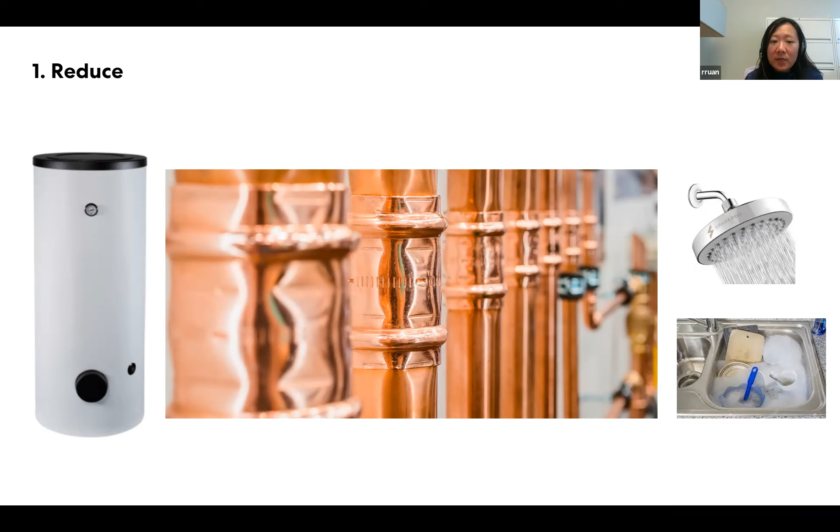Second, we try to recycle the waste heat. UVEC, as presented by Cass previously, is a very big building, and it has 2 buildings, and it has a lot of opportunity to use the waste heat. One thing we found is trying to use the waste heat from the shower drain. Probably most of you are familiar with this product, which is the shower drain heat recovery. What it does is recover the waste heat from the shower drain to preheat the incoming cold water before it reaches into the shower mixing valve.

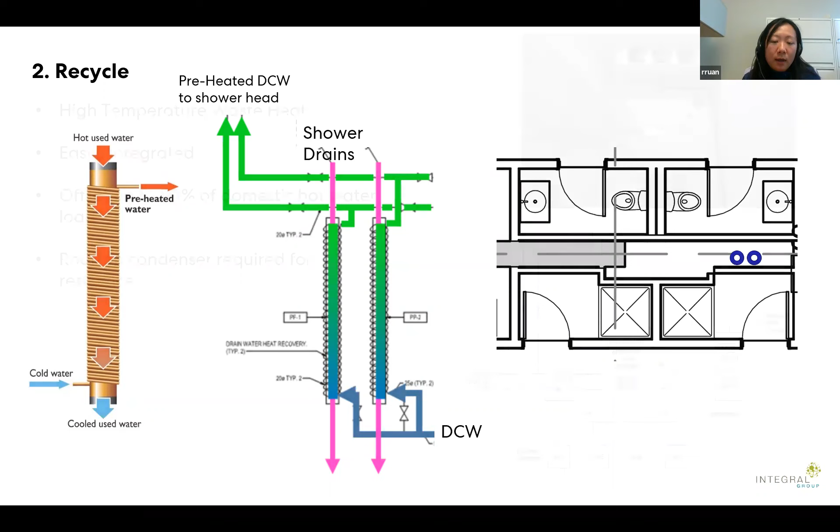The other thing we're trying to recycle is waste heat from our massive commercial kitchen, as it has a lot of waste heat from the coolers and freezers. Traditionally, you'd reject this heat and dissipate it through a dry cooler. In our case, we're actually trying to collect all this waste heat and dump it into a preheat domestic hot water tank. This way, you reduce the hot water load further.

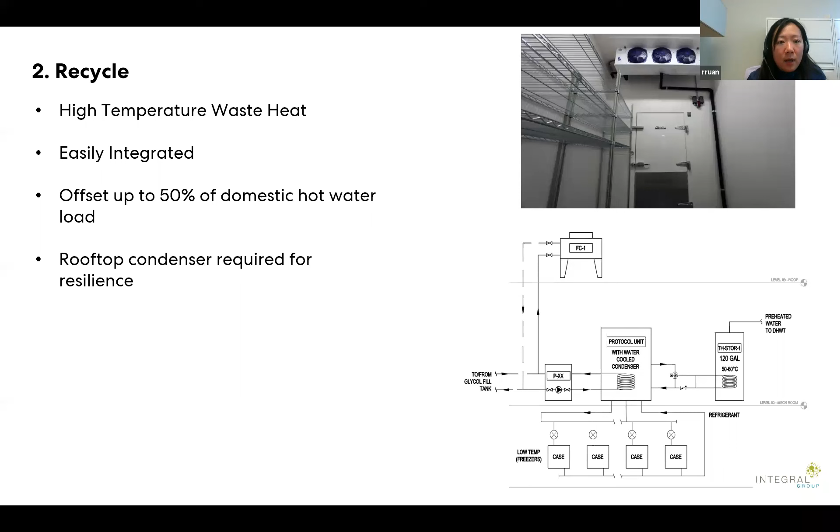After you minimize the domestic hot water load to a minimum, you need to think about how to generate the remaining domestic hot water load. There's currently two options. One is to use the existing campus-wide district heating system, which is gas-fired. The second option is to use an air source heat pump, the high-lift type.

From an engineering point of view, it's a no-brainer decision because, compared to a gas-fired district heating system, an air source heat pump has a way higher COP, usually between 1.5 to 2 or even higher, compared to the efficiency of gas, which is about 90% even with a very efficient condensing gas boiler. So the energy input will be significantly lower.

Also in BC, as Maria mentioned before, the carbon intensity of gas is much, much higher than electricity, which is produced from hydro. The only con of using an air source heat pump is that the COP does depend on the external air temperature or the ambient air temperature surrounding it. So in order to meet the design temperature of Victoria, which is -8, the options have been quite limited, which we'll touch on later.

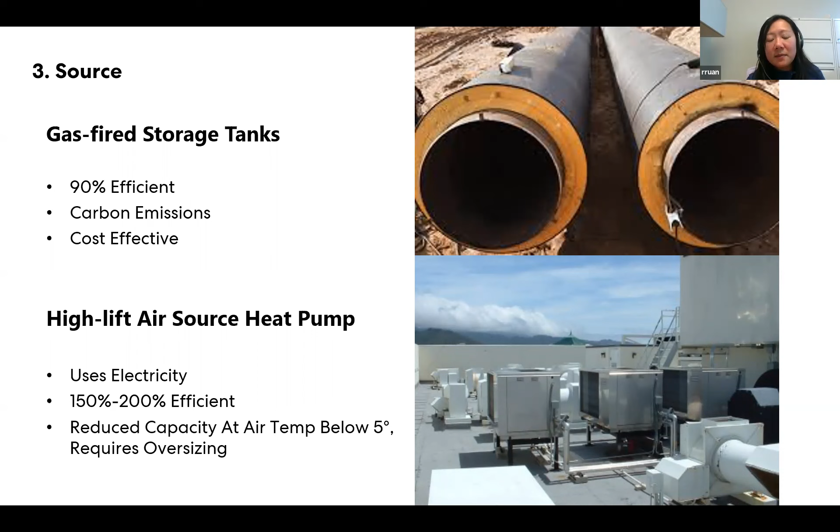As we just mentioned previously, the university's driver and entry point into high efficiency was really driven by carbon. That's their institutional value set, which is noble, which is great, and we support it. However...

Not that many years ago, they had invested roughly $20 million into upgrading their district energy system in anticipation of this project coming online, through their master planning. So they had all this capacity in their district energy system that was built for this project. And then we came along and said, hey, maybe you don't want to do that. Maybe you want to leave that cost that's sunk in there for a different use or something else, but we're basically telling them that's not really how you want to go in the future.

Interestingly, I think the university is now starting to think about their whole energy system and their energy future, which I think is something we'll start to see more of from institutions coming down the pipe.

So really what we saw here is the university did decide to go toward an air source heat pump at an increased capital cost. It's very cheap to plug into the existing DES because they already sunk the capital cost in at the plant. They got an 88% annual greenhouse gas or carbon reduction. However, it did come with an operational increase.

If you remember at the beginning, we talked about electricity in BC being about 3 times the cost of gas, roughly. So although it's higher efficiency, you end up with an increased operational cost per year, and increased capital cost. But the university really stood by their value set and said, no, that's the way we want to go, and that's the future.

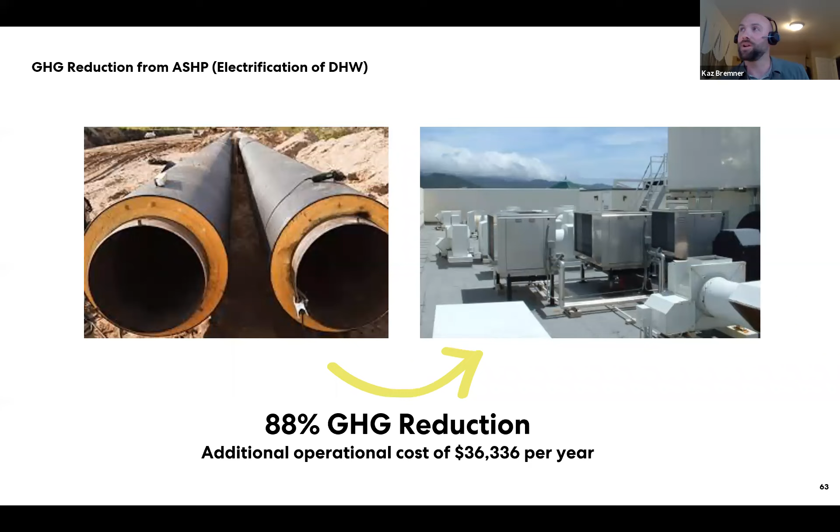Another thing, I don't know if Rufi mentioned, she will, coming up, is just around being at the bleeding edge of the market with some of these products and some of the complications that brought in.

After talking a lot about how to incorporate these innovative designs to reduce the overall energy demand and space heating demand, Kaz, Maria and I thought, oh, finally we can perhaps sit down and relax for a bit. But actually it's really far from being relaxed.

One thing I've learned from working on this large-scale passive house project is that the design process is never linear. It's always going through twists and turns. One challenge we found is that the North American market is still developing large-scale, high-efficiency mechanical equipment, which I'll demonstrate with three examples.

The first one I want to talk about is the journey of specifying the kitchen heat recovery. As Maria and I mentioned before, it's very key to keep the space heating demand for kitchen ventilation to a limit, as we still need to provide a lot of kitchen exhaust flow rate, even after using all the technology we have to try to reduce it.

From the beginning of the project, we had always been using a Halton heat recovery unit, which we'd also used for other projects before. However, around 50% CD, on the day we tried to submit our progress to Perkins & Will, I received a call from Halton telling me they no longer produce that heat recovery unit.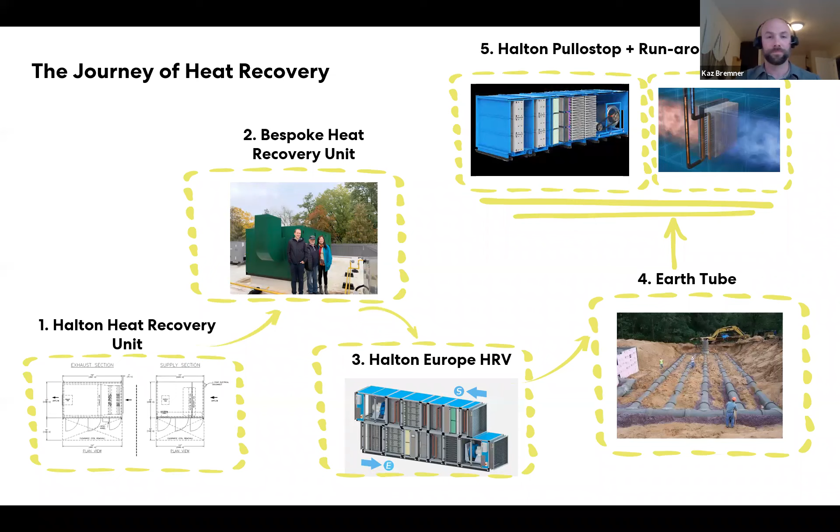So the other thing we wanted to specify is a large-scale air source heat pump, and it's been challenging because of supplier availability. Ideally, I'd like to specify a CO2 air source heat pump because it has zero global warming potential, which is perfect. However, the only CO2 product we found is a Sanden product, and the output is only about 4.5 kilowatts. So if we had to use that product, we'd need about 60 units just for one building, the one with the commercial kitchen.

So that's not feasible. So then we looked into large-scale air source heat pumps, and the majority of them can only operate down to 4 degrees, which means you need a backup when the external weather is below 4 degrees. Eventually we found this product from Colmac, called CxV, which can operate down to -8 degrees, the design temperature in Victoria. However, it's quite small compared to large-scale units, so for building one we still had to specify about 15 of them, but that's the best we could do.

And the last one is about heat recovery units, which is also a very interesting process when specifying the product. Most of you probably know Swegon has been the dominant passive house certified large-scale heat recovery unit supplier in the North American market for a very long time, and we've been using them to form the design and space configuration from the very beginning. So when we issued our tender and were preparing our addendum, suddenly we got a call from a second supplier, called FläktWoods.

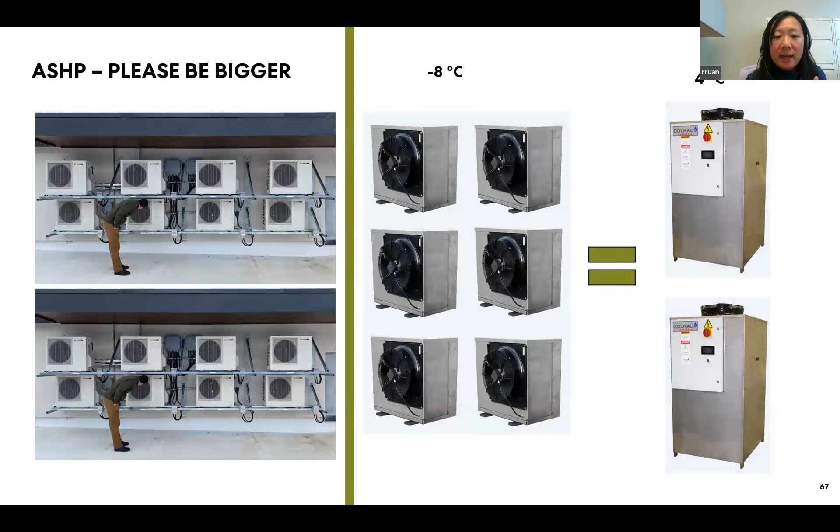They basically work along with Trane, and they were finally getting the certification, or in the process of getting passive house certification for their large-scale units. They were really keen to join, and in order to encourage fair competition and allow more suppliers to be included for the client's benefit, we included them in our tender addendum.

After we issued the tender, and now approaching the end of IFC, we actually got a third call, from a supplier called Multicross. They told us they're also entering the North American market, trying to join in selling large-scale passive house certified heat recovery units. It's really good to see more suppliers trying to join this market, and I'm confident the next project can have multiple suppliers included in our specification, encouraging a more fair and competitive price for the client.

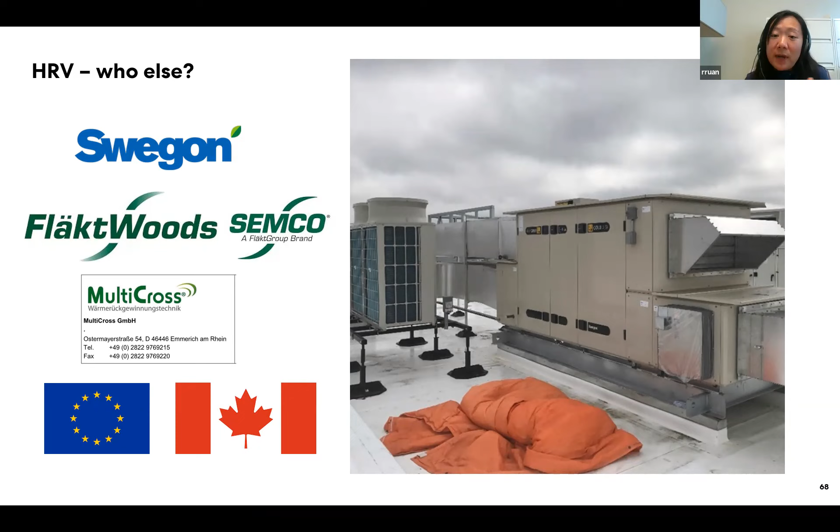So that was just another story to tell for this project, in terms of how to find an alternative supplier and the right suppliers for the project, which Marine and Kaz will talk more about in the next section. It was interesting getting these calls and understanding that more and more products were coming on the market, but it's not as simple as saying, oh great, you've got a new product, let's use it.

With all of the strict criteria we're trying to meet, Marine is sitting there with a thousand different levers in front of her trying to balance them all. So just swapping out units is difficult, and that's something we wanted to get into. This is a new section we haven't really presented before, but something we've been grappling with more recently through the tender process and the tail end of design. So we'll talk about three primary items here.

Late in the design process, new issues emerged, or we came across new things. One was spending our design buffer - the whole time we were trying to tender under 15, so we knew in case something wasn't available, for whatever reason, we'd have a little bit of buffer, which is just good practice, particularly on something of this complexity. Then an approach, lessons learned from value engineering or value analysis versus an energy performance perspective. We did go through a value engineering process on this, and there were a lot of different conversations we wouldn't normally have.

And then substitutions, going back to the equipment, we'll have a different example, two examples we'll walk through quickly. We'll try to wrap this up in about 9 minutes or so to leave some 20 minutes-ish for Q&A.

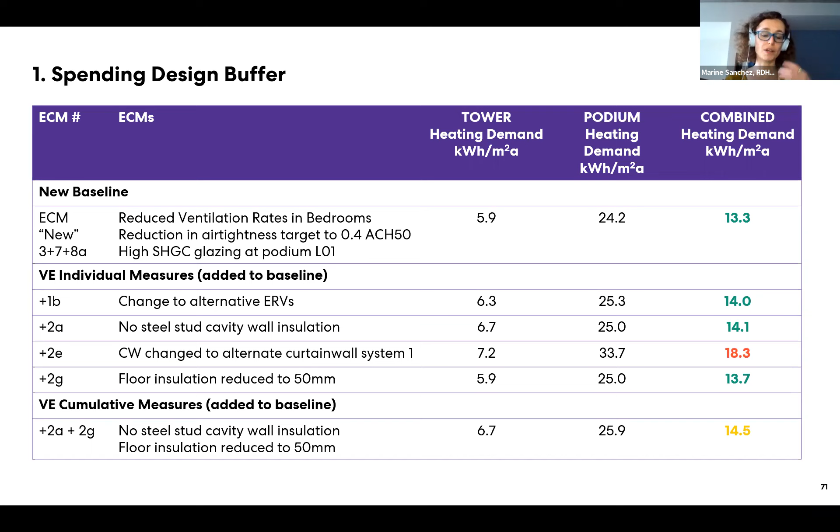And what you can see is that we finished at 14.5, which is the bottom right of the table, after testing a few options and deciding on the exact combination, looking at the impact on both energy and cost. So great, we're there - this is where we're supposed to be.

However, now that the tenders have come back, we're looking at a whole list of VE. And what is different from typical projects is that performance has to be maintained. There is no way around it. It simply has to be.

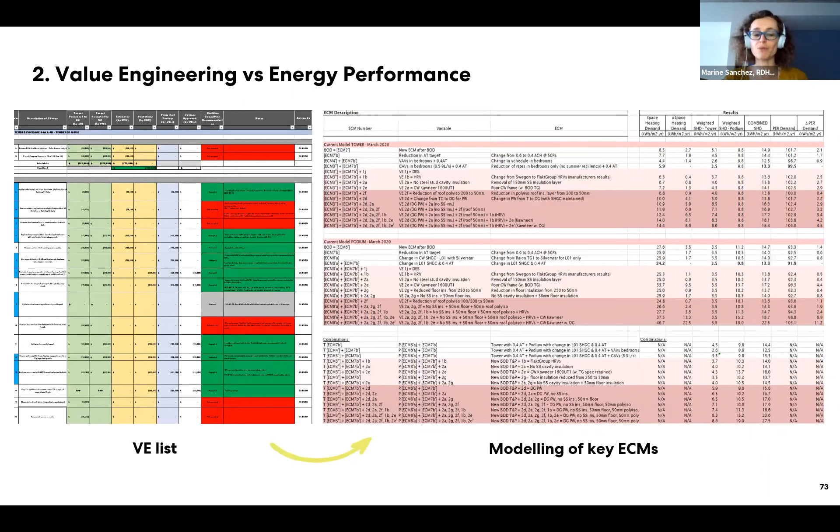And what we found is that the need to maintain performance makes this project different from a typical one. We found measures that worked really well and some others that worked a little bit less well. We'll just talk about a couple examples here.

It was interesting too, because we did the CM on board and had trades actually on board as we were going through VE. So we were getting feedback from all these different groups, and some suggestions were great and some were not great. It was really interesting because some of the trades didn't really know what they could touch or couldn't touch, so we had some interesting dialogues there.

One thing we looked at - we were originally following the client's technical guidelines wanting an inverted roof. We couldn't have a proper inverted roof because of the buoyancy of the amount of insulation on the roof, it would require so much ballast it was getting ridiculous. So we had a split inverted roof, somewhat conventional with still a protected membrane on top. There was value savings to go down to a more conventional roof, and that was something we could accommodate - we could make that switch and achieve the thermal performance. So great, that worked out really well.

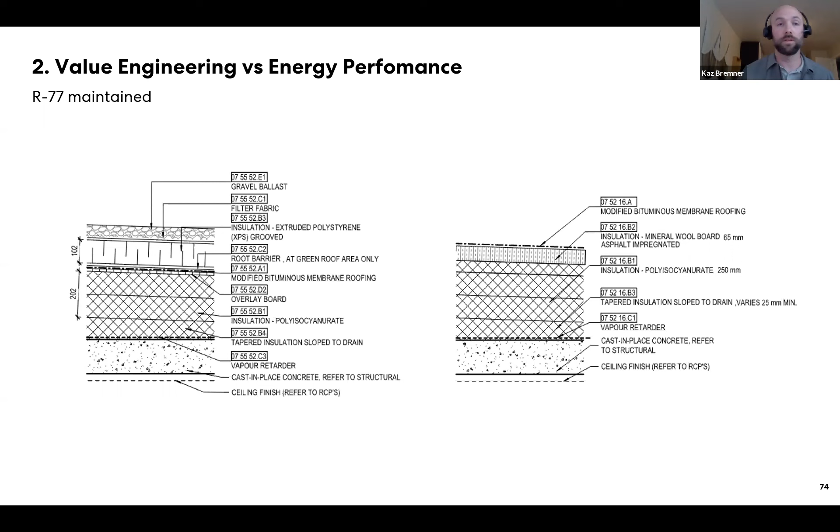Another one we looked at - there were two options here. One was reducing the below slab insulation, which was on a previous slide in terms of spending our passive house buffer. We reduced the below slab insulation, and then a trade brought forward the option to move to a different type of insulation, from extruded to expanded EPS. But it was an interesting point where they didn't understand that to get the same insulation value per inch would put us back - it would produce no savings. So it was an interesting conversation around people understanding thermal performance metrics and how that relates to cost. Some things we just couldn't do, and some we really could accommodate.

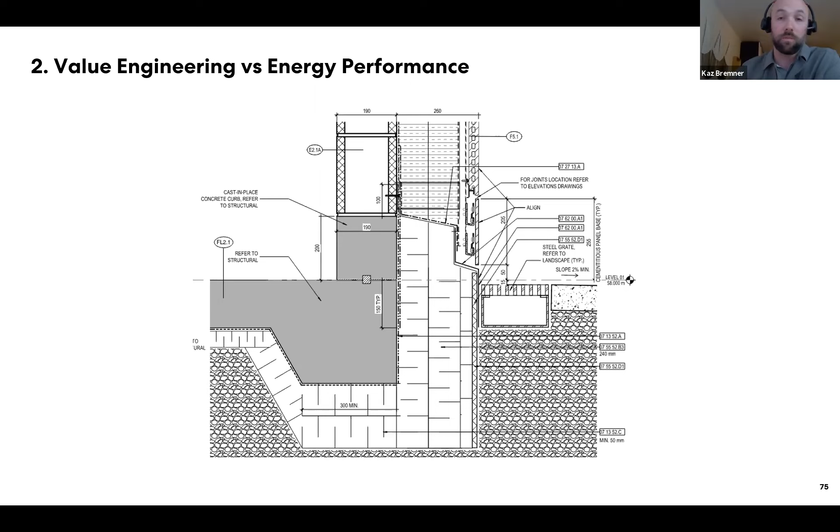More complex though was this. One final example on the substitution was on the curtain wall. We were originally given a product substitution saying this curtain wall is going to be replaced by that one, and that one is still a PHI certified product.

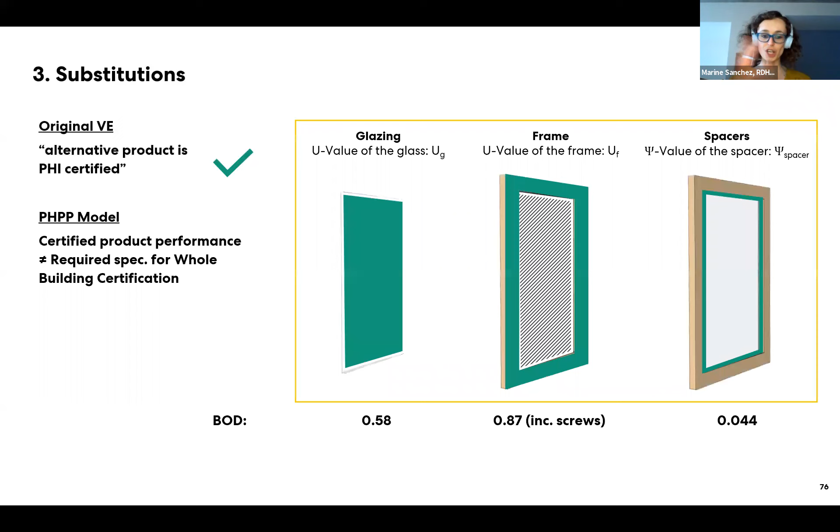So the entire team were like, yeah, sounds good, sounds like exactly what we're trying to do. But diving into the detail to check that performance is maintained led us down the deep end. A certified product is not the same as the spec or performance target that you've set for your overall building. Because Passive House is not prescriptive, so we get to be the chef with our own recipe and decide where we want to spend our energy budget.

The three key impacts, without diving into detail on a window type product, are the glazing, the frame, and the spacers. You can see at the bottom the basis of design we were working with for the tender documents. Then the alternative was like, yeah, we can do the same, we do better, it's all good.

Trying to speak the same language and get an apples to apples comparison, we had to dive into reading performance specifications and test data in German, when I don't yet speak German, where we started understanding that some values were presented in a certain way.

So we came back to the like for like comparison, which was, oh, actually you're slightly higher on this one, but maybe slightly better on the next. That was purely for the fixed part of the curtain wall. Then we added additional levers and moving pieces through the glass carriers typically required with curtain wall, and operable vents within the curtain wall, where the glass carriers were worse, the operable vents were better, but the doors were worse.

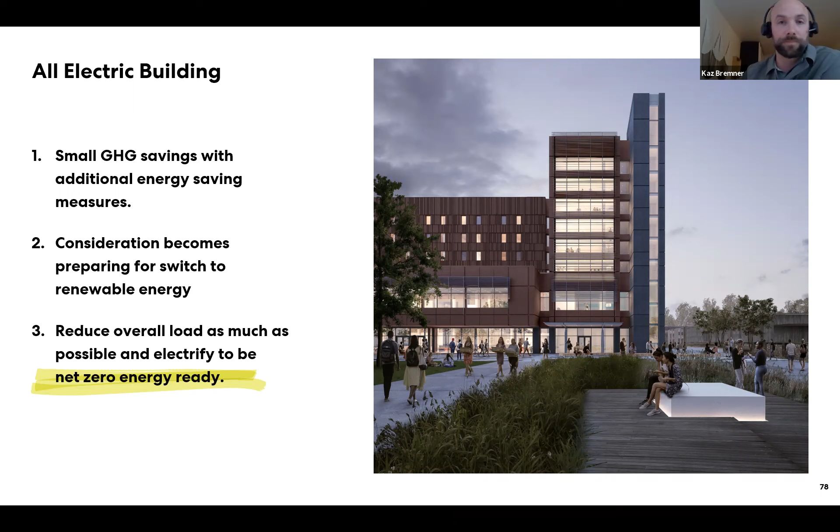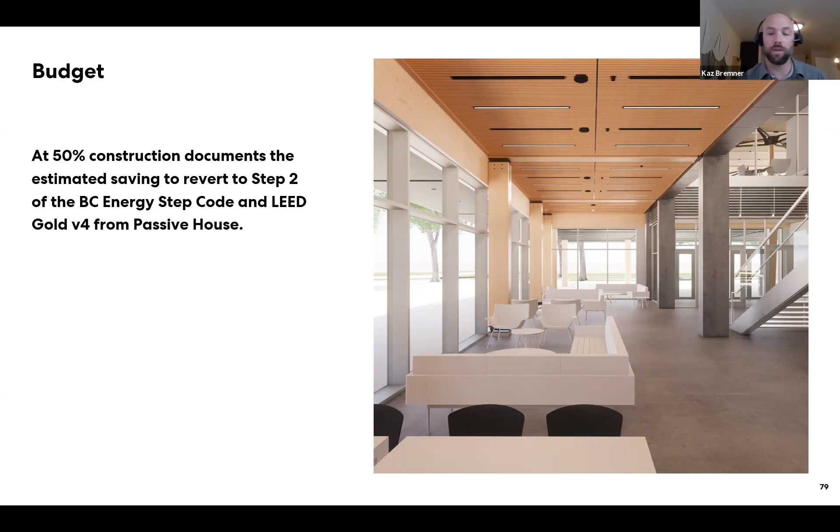Another question we've received a lot through the process is, every time we speak about this, what is the cost premium for this? It's really difficult to say, but one study we did do with BTY is at 50% construction documents, the university requested, since this building is pursuing passive house certification as well as LEED v4 gold, what would be our cost savings if we dialed it back to just a LEED gold building and removed the passive house requirement? So it's not really cooking it from the ground up. We reduced the insulation, did all the changes we thought would make sense, running it through the passive house model, and we came across about a 5% premium.

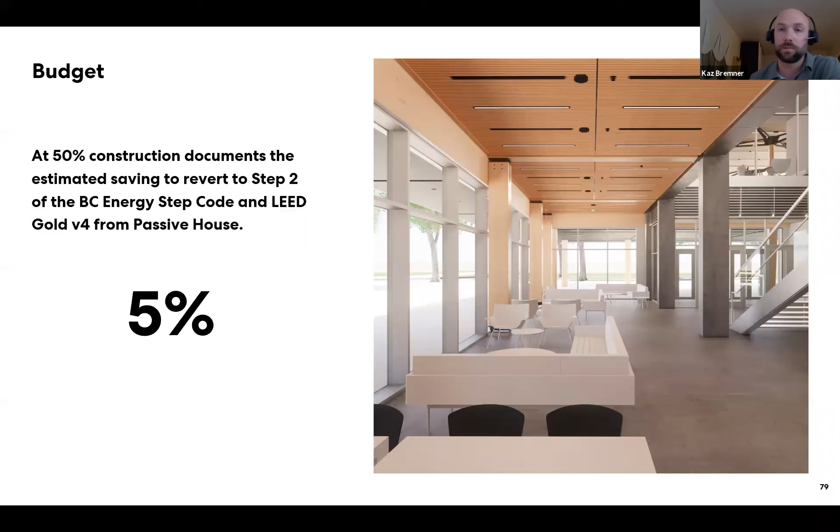Is that premium typical? That's just for this project. We have a large commercial kitchen that may be different for a traditional MURB project without that high intensity specialty use.

And then a couple of other lessons learned from UVic and the consultant team. The university has found pursuing this process really valuable, just in terms of the institutional learning that's taken place. They now have an understanding of high efficiency buildings that's much more robust than they previously did, and it helps provide guidance -- they've walked through this, so now they understand really what they're asking for in future RFPs. Also, their staff members, their internal shops groups, their mechanical teams, are now subject matter experts. They've reviewed air source heat pumps, they've talked about these things in terms of maintenance and life cycle, so that better equips them for these conversations in the future.

The really big win for them was increasing to about 623 beds, but with a net decrease of greenhouse gas emissions. So they're growing their campus and moving the dial in the right direction. One thing we didn't really talk about a lot is the kitchen -- by switching that to all electric on our low carbon grid, they avoid all that lock-in. If they built a gas kitchen, for however long that kitchen's lifetime is, they'd be continually burning all that gas. So when we talked about switching that kitchen equipment, there's an 88% reduction in greenhouse gas emissions -- and that was for the entire building, not just for that kitchen. So it was just a tremendous impact.

So with that, I mean, we've covered a wide range of material, but I'd love to open up to questions.